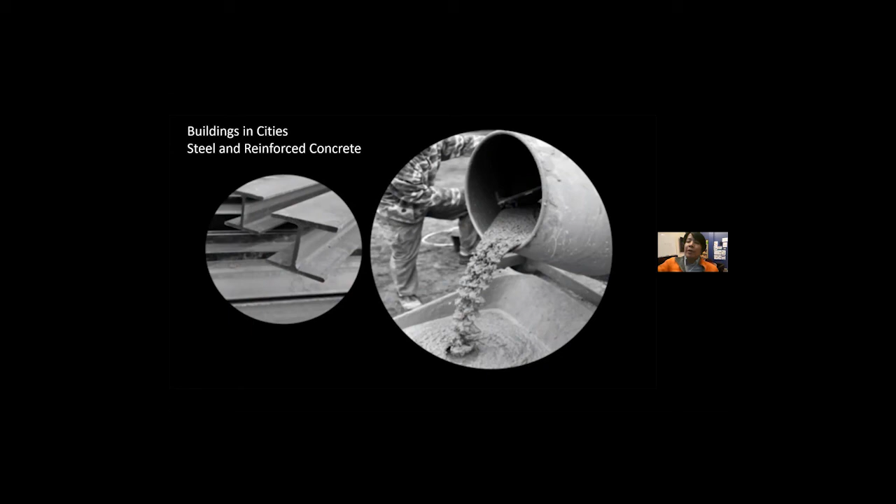So if we somehow replace the use of concrete, 1 cubic meter of concrete replaced by timber or wood, we can actually reduce the emission of CO2 by 1 ton. That means we're going to cut down the 11% CO2 emission from the construction industry. So, we've been using the power of the sun to grow our food. Maybe we could also grow our city using the same power of the sun, grow our city by using more wood instead of steel and concrete.

And in terms of the United States, what we know here is about 40% of the US population actually reside near the coastal area counties. Many of us like to live close to the waterfront, and more population in the US will in fact shift towards the coastal areas. One thing about coastal areas is they are also subjected to many natural disasters, especially hurricanes, and subjected to high wind, especially along the eastern coastline and the Gulf Coast area.

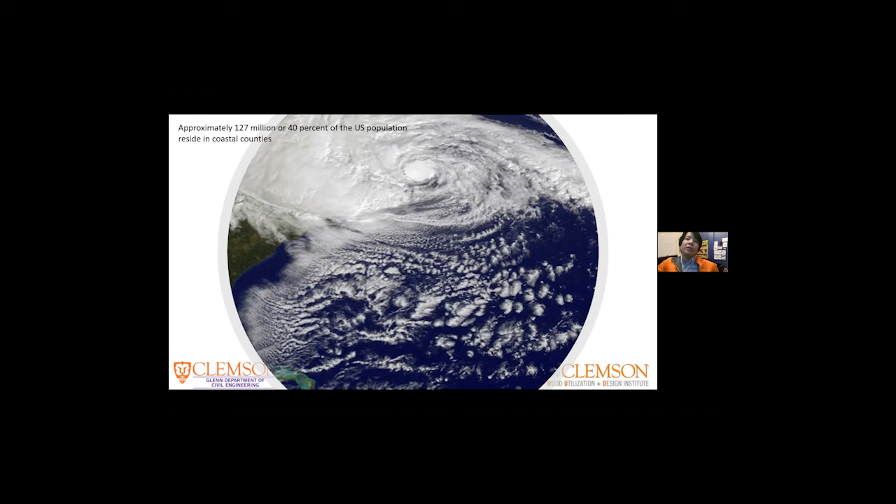And we often see, after a major hurricane makes landfall or even a tornado event, our structures are damaged, especially residential homes, apartment buildings, hotels and so on. If you look at economic losses on average, hurricane, windstorm, thunderstorm, and tornado related events, including flooding as well, account for about 54 billion US dollars. If you break it down further, 34 billion is residential home dwellings, 9 billion lost to commercial, and 12 billion to public sector buildings, right?

Many of you, I believe, understand cross-laminated timber is a much better or resilient structure. So we suspect it has the potential to resist the demand of high wind events. So at Clemson, we looked into this problem. I'm a civil engineer and professor by training. We have several projects looking into the potential use of CLT for high wind application, all right? So I'm going to go through some of the research studies.

One is what kind of debris impact resistance we can expect from CLT. Obviously, in a high wind situation, you have debris flying around. It might impact the building envelope of our structure. Regular light frame structure is not very resistant to debris impact. We also have some research looking into the lateral load impact on the building, the wind blowing on the surface of our building. At the end, we quantify overall building performance of current light frame construction versus CLT, and what added benefit we can get from CLT.

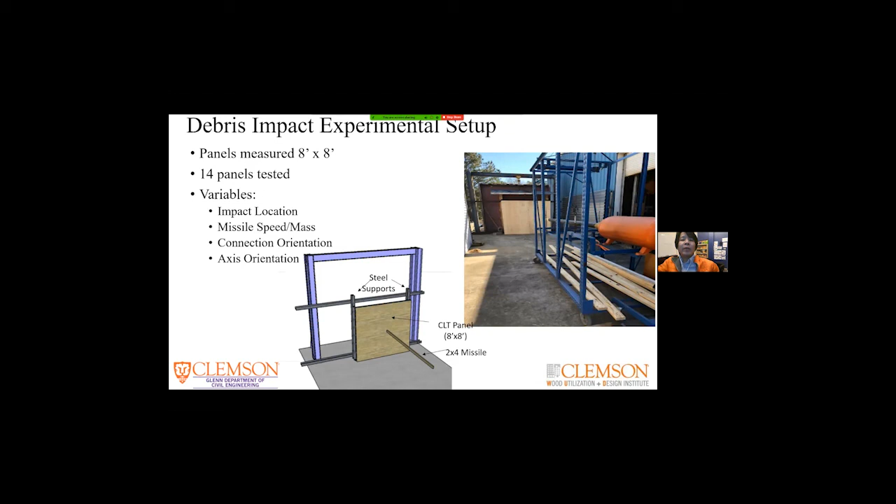All right. So we tested a total of 14 panels, with different missile mass and speed and impact location. If you hit it near the corner versus near the middle of the panel, it gives you a different response, and some locations are much more vulnerable. And also the connection orientation: sometimes you have the panel directly bearing on a return wall, sometimes it is not, when you hit it from the other angle.

So, if you follow the ICC 500, the FEMA safe room guideline, we need to define certain failure criteria. So there are 3 different failure criteria. Obviously, if you have the debris punch through, like penetrations, that is considered failure. If you have permanent deflection, if you look at the picture in the middle here, you have some deformation at the back side of the panel. Anything more than 3 inches is considered failure here.

The other failure definition here is if you somehow have part of the wall dislodged, for example, one piece of the lumber delaminated from behind the wall, that is considered failure as well. So we track all those at different impact locations, corner, middle, and so on. I'm not showing the detail behind the scene. So we tested different locations and different panels. We come up with what is called the fragility curve.

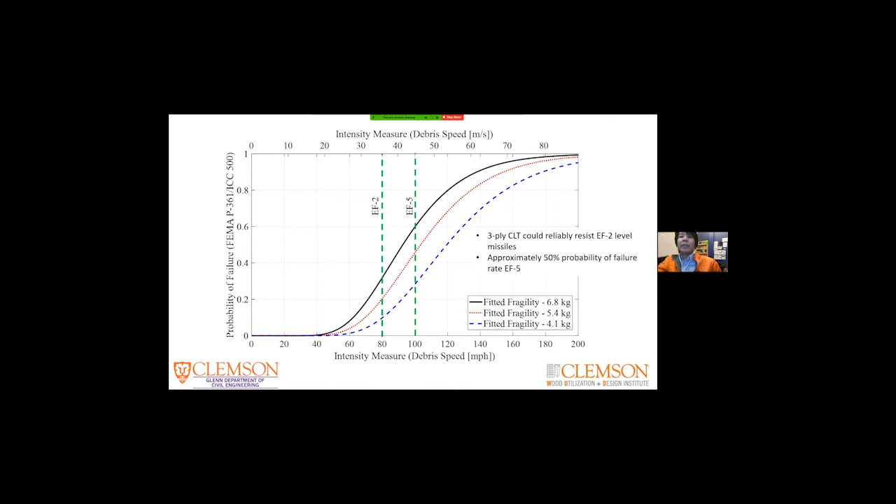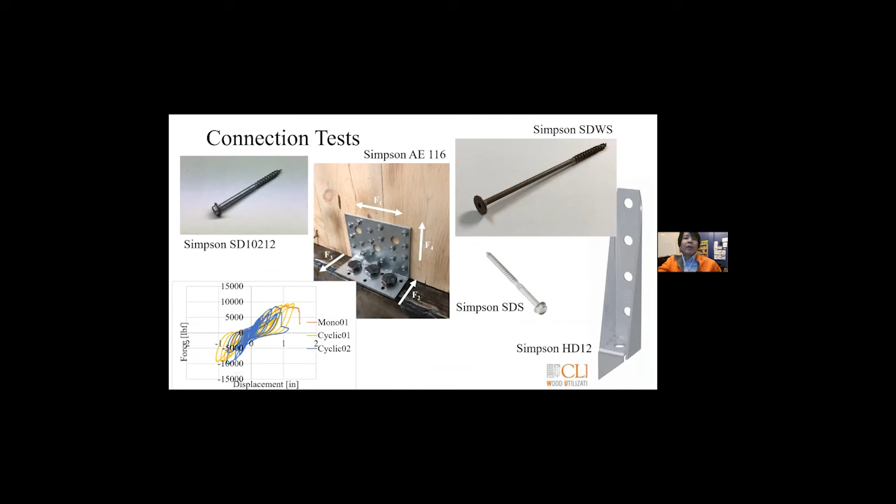We test all this because we cannot keep testing full-scale walls in our lab. It's pretty time-consuming and costs a lot to conduct the test. So after we perform all the connection tests, we can build a computer model and put in all the behavior of the connector. The connector is much easier for us to test at a small scale. And we create the computer model that can actually mimic our full-scale test response.

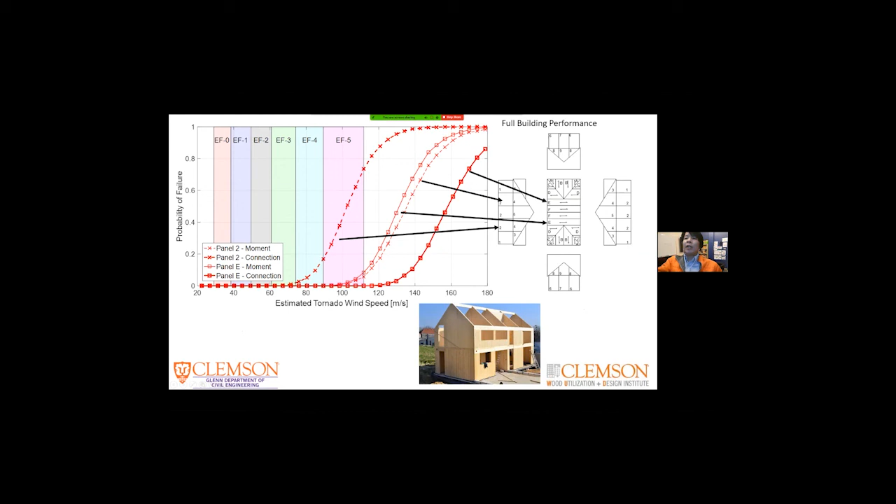And from there, we can put together a full-scale CLT building and then use computer to simulate the behavior under different wind load and debris impact, right? So at the end, we consider the moment, rotation, the connection failure, and so on at different panel joints. So collectively at the end, we are able to quantify, hey, for a typical residential building, if we have light frame, we have a lot of experience with light frame, versus CLT, what kind of performance increase we can obtain here. So again, this is something called a fragility curve.

Vertical axis tells you the probability of failure, damage to the building, light frame versus CLT. Horizontal axis shows us the wind speed, estimated tornado wind speed here. Clearly you could see CLT is much more beneficial here. It can pretty much resist damage up to EF3 tornado. Around EF4 and 5, you start to see a high probability of failure. Consider light frame structure, pretty much under EF1 and above, you can expect almost total destruction to the light frame building here. So clearly we see benefit in terms of building using CLT here.

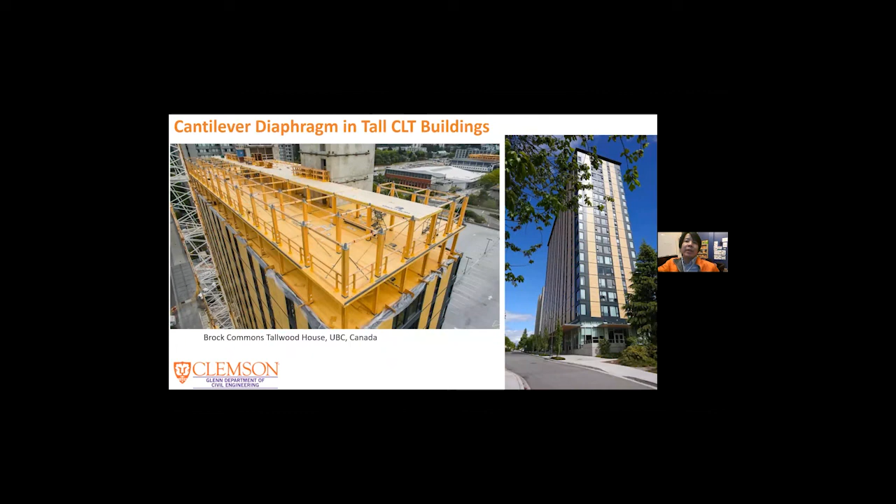I talk a lot regarding residential low-rise structures. In fact, the major market right now for CLT is in mid-rise and also tall CLT buildings. What you are looking at here is Brock Commons Tallwood House, student housing, a student dorm constructed on the UBC campus in Canada. This is an 18-story CLT building. They have a concrete core to support the building. And in this kind of building, often you see big openings at the perimeter of the structure. That means there's not much wall to provide shear resistance, okay?

So if you look at the floor here, just take this piece of floor, it's called a CLT floor diaphragm. That's why we classify it as a cantilever diaphragm, because why? It's attached back to the core structure here, right? So it's fixed to the concrete core. If wind or earthquake loading pushes on it, we can expect shear deformation. The floor will try to deform into a parallelogram here. So far, there's not many tests for CLT diaphragms.

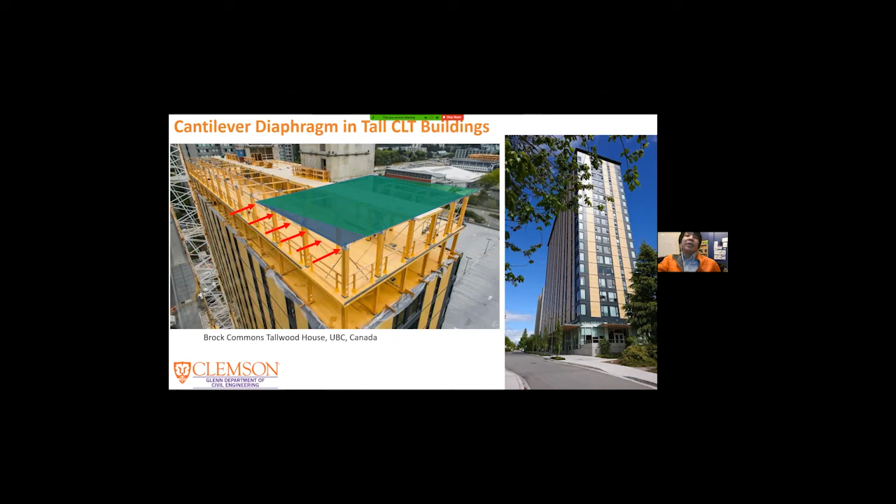So what we did here at Clemson, we constructed a full-scale CLT diaphragm, a 20 feet by 20 feet CLT diaphragm, and simulated the cantilever behavior. What you are looking at here at the corner, the steel beam, is to simulate the concrete core, fixed condition, and we use an actuator to push the end. In this diaphragm, we have 8 pieces of 5 feet by 10 feet CLT panel. At the joint here, we routed a groove 1 inch deep and then put plywood on top and then used nails to stitch those joints together. At critical locations, we also put in tension straps to carry the tension load here.

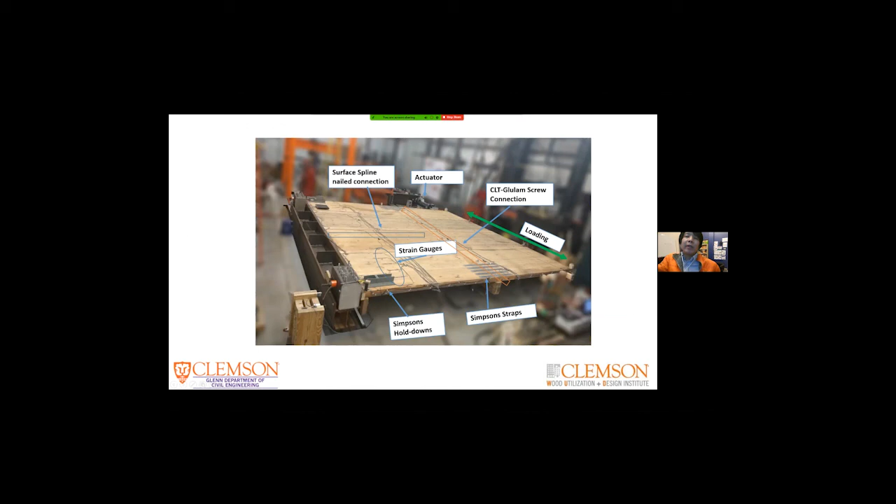If you push on it at the end of the cantilever diaphragm, here, right, at this joint, it will try to open up. So there's a very high tension force. So we use tension straps to pull it together. Now, based on our engineering knowledge, we designed this diaphragm to take up to 22 kips of force from the actuator. So this is a picture showing the actual diaphragm in our lab setup. You can see the metal strap here and the giant hold-down manufactured by Simpson Strong-Tie company.

So here I'm just showing a video. We put a GoPro at the roof of our lab here, looking down to the diaphragm. What you see is the actuator keeps pushing on the diaphragm, and you can see the metal here shining, right? Kind of light reflection. That is actually the metal strap yielding, almost breaking here. And we keep pushing it, at some point it breaks. You can see the separation here. So we are able to quantify at what point the strap will break and at what load.

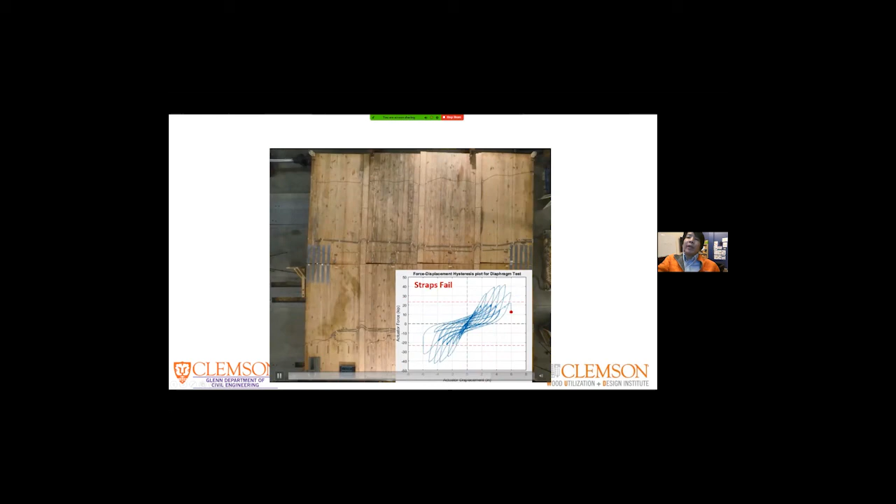So at the end, if you briefly look at the summary of the result, the peak load is slightly over 42 kips at around 4 inches of displacement. In terms of the engineering calculation, in fact, it's quite accurate. If the engineer goes by the engineering principles, our design load is 22 kips. We actually have a safety margin of about 1.8, close to 2, which is what we target. And also the tension strap did not break until post-peak.

This means before the design load, it actually is protecting the diaphragm without breakage. So that is what we learned. And similarly, we put together a computer program to model the whole thing by simply testing all the connections. We are able to use the computer program to represent what happened in the full scale.

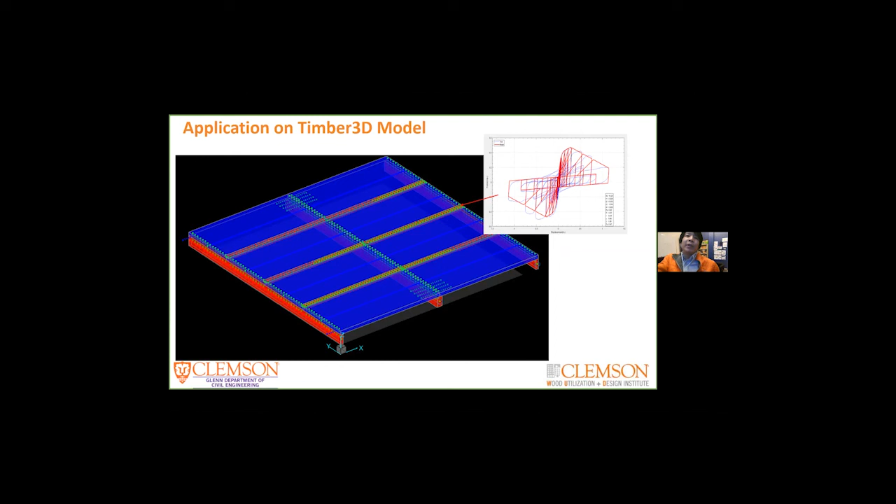And again, it is too time consuming and too costly to keep testing every possible configuration. So what we can do here is use the computer program to test different configurations and layouts for CLT diaphragms. Now, with that, I'm going to come back to try to answer the question: is it worth it building residential structures with CLT? In terms of risk assessment, it's the safety.

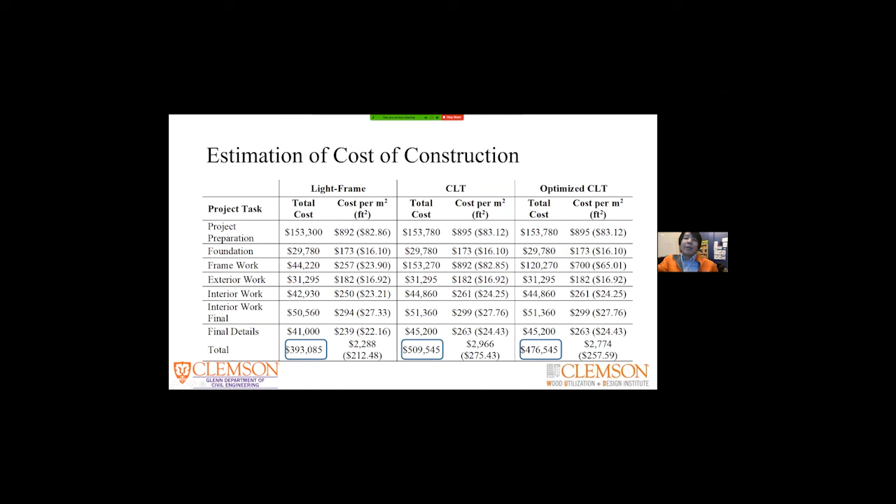So we actually costed out a typical light frame structure at a certain location. Here, we're trying to compare the same construction by breaking down the whole construction cost into project preparation, foundation, and so on. CLT at the end costs more because it uses more wood, material-wise and so on, compared to light frame, 393,000 versus about 476,000.

However, one thing you need to recognize is we have not considered other costs such as loss of human life, downtime, and injury to the occupants. These are the costs we have not included. If you include those kinds of costs, perhaps it is worth the investment to build even residential structures using CLT. I think that's all I have to share with you guys.

So really, this presentation was born out of frustration of working with developers, architects, owners, engineers, all really interested, like the people at this conference, in building mass timber structures, and then running into the wall where you get your first cost estimate, and they say, well, this mass timber stuff is way too expensive. So it goes off the table, and that's the end of that.

And I wondered what I could actually do to maximize the possibility of success with a mass timber building. Yesterday, there were a bunch of questions asked that were framed in the form of, well, we're designers. What can a designer do? What can a designer leverage?

And that's really what this is about. It's about really decisions that designers make that ultimately can really affect the cost of the building. Drew yesterday from StructureCraft talked about this at some length as well. In fact, if you've been listening closely, I don't think there's anything in this presentation that is different from what you may have already heard at some point in the symposium, but it'll just be presented maybe in a little bit different way.

My approach is to go through the dollar cost of different parts of a mass timber building, starting at the low end with elements, and then working my way up to just single bays, and then larger building types where we actually incorporate all the IBC building types, and then looking at entire building archetypes in steel, timber, and concrete. And I'll finish with a little bit of discussion about embodied carbon, because I've vowed not to talk to groups of people without bringing it up ever. So I'll finish with a hopeful note there.

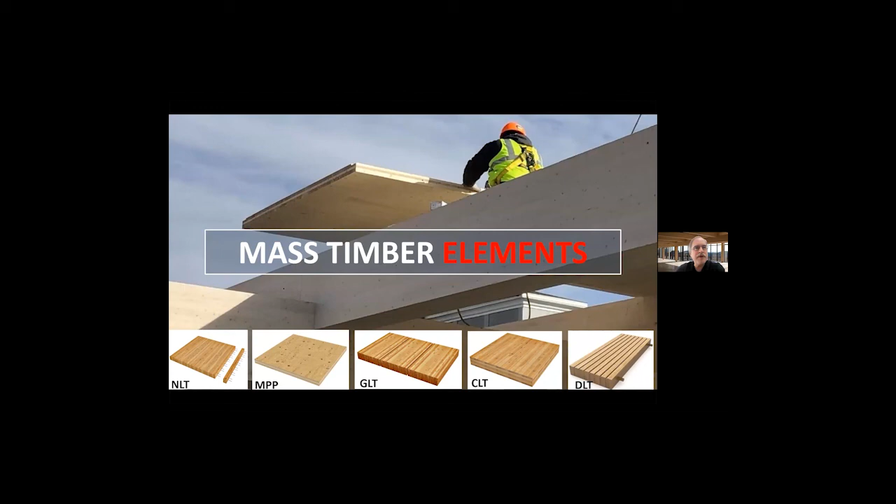My first slide, since I'm going to talk about cost, I thought I should start by talking about the commodity element of mass timber. CLT is made up of lumber, and lumber prices go up, they go down, they're going up and down probably even as we speak today. It can be very, very dramatic. And that's another way of saying that as I go through this presentation, I'm going to show you dollar per square foot costs of mass timber structures and other kinds of structures. And this slide tells you don't believe it for a second in terms of the actual final cost.

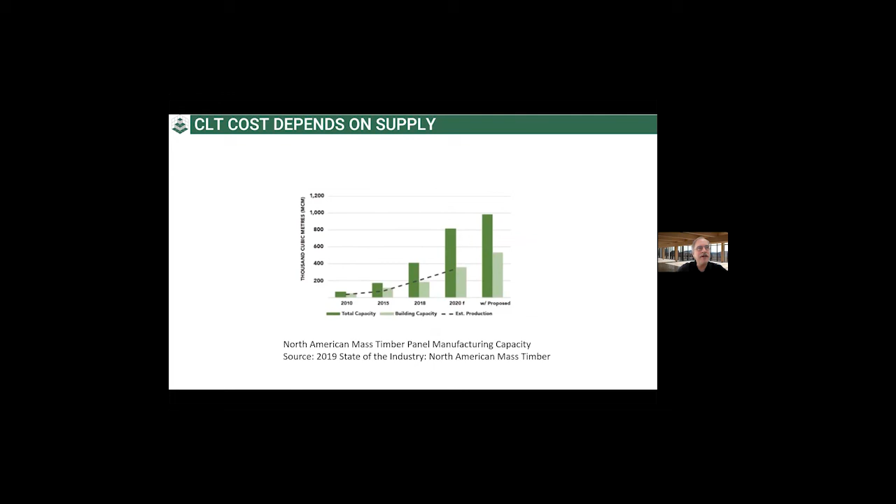I'm used to pricing steel structures. Steel structures are driven pretty much by labor: 2/3 of the cost is labor, 1/3 of it is material. For mass timber, it's the other way around, and even exaggerated a little bit. I don't know what the fraction is, but it might be 80% material and 20% labor, or even more. And that's actually kind of good news for designers, because it's easy to keep your eye on wood volume and know that if you decrease the wood volume, you'll be decreasing the price. We've worked on our end to try to get floors and roofs down to 3-ply wherever we can. At the end, when we start talking about carbon a little bit, it goes the other way. Of course, that 9-ply CLT sequesters a lot of carbon, but we're starting out talking about cost.

The other thing is that CLT is really not a commodity. It's made in a lot of different places. Each manufacturer does it a slightly different way. They have different widths, different lengths, different lamination thicknesses, species, finishes. It's really quite a dramatic variety. So you cannot treat it like you're ordering a sheet of gypboard, right?

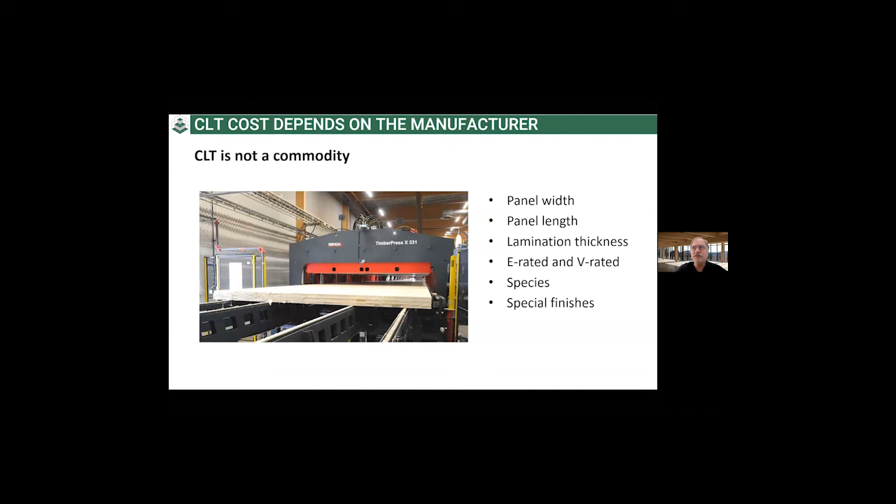At the end of the day, you're going to find that the best way to truly optimize the price is to find a way to be sitting with the manufacturer as early as possible in the process, or the fabricator, the people that are actually going to build the structure. I'm pretty sure that Lucas will back me up on this. His group actually supplies that kind of information early on. And the earlier you can get to the table and know the specifics about their product, the cheaper you'll be able to make it.

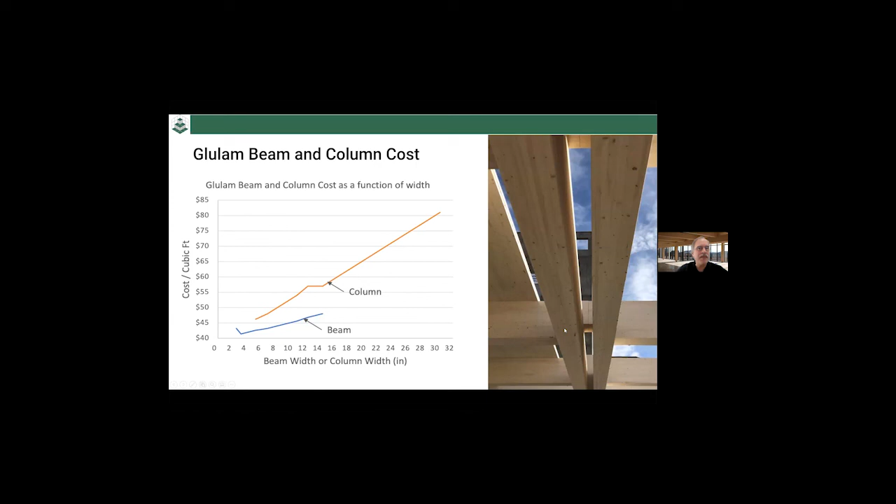So again, this is something that you need to get or understand from, or just be counseled by the fabricators themselves. And likewise, glulam beam and column costs that form a part of the following studies are just unit costs. Some people find it interesting, myself included, that the unit cost of glulam, the cost per cubic foot, is actually dependent on the width. So the wider the beam is, the larger the cost per volume is. So it's not just linear with wood volume. So that's an interesting point.

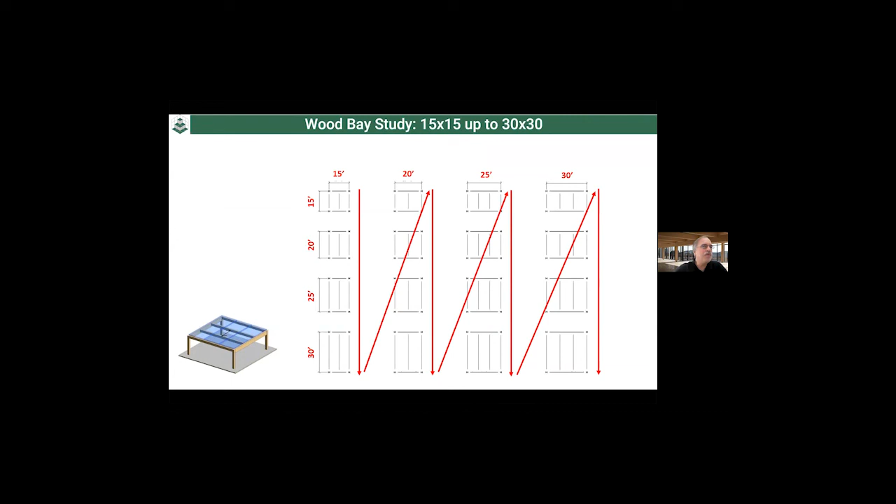So now let's take that information and move it forward and look at the cost of just some very, very simple bays, square rectangular bays. And this goes back to a study I did a couple of years ago now. Just very, very simple minded. I framed out a typical bay, starting with 15 by 15, and then I increased the beam lengths up to 30 feet. Then I went back and increased the girder length up to 20, and increased the beams again, and so on down the line until we got up to 30 by 30. Then I applied all those rules for cost of the elements based on volume and so on.

And I made this plot, which shows the cost per square foot for each of those different grid sizes, one by one. The brown section of the bar represents the cost of the wood. The red represents the cost of connections, and the gray is constant because that's the cost of the topping, which I didn't change for any of those. Interesting to note, although I'm not going to go into it today, is that the percentage of the cost of the whole thing that is connection is significant. So connection design, while I'm not going to talk about it, is super important.

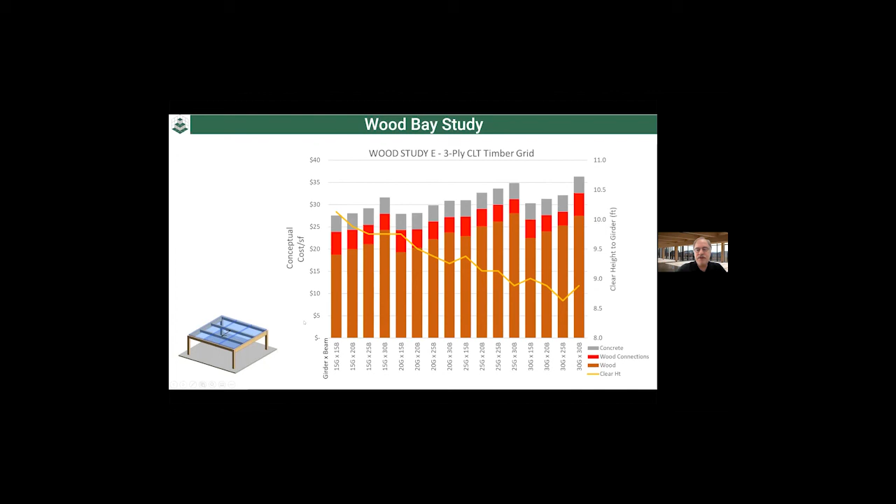Another piece of data here is this orange line, which goes along with the right-hand side. And that's telling me the clear height for a 12-foot floor-to-floor to the bottom of the beam. So you can see, obviously, the longer the span, the deeper the beam, the closer you are to knocking your head when you get to the end. What's most interesting to me about this plot actually shows up when it's shown relative to another one.

Sherry brought this up yesterday, which is don't start with a steel building and then superimpose a wood idea. Wood needs to be designed as wood. Going back to Louis Kahn, what does steel want to do and how does it work? What does wood want to do and how does it work? If you want a cost-effective wood building, design a wood building. Don't put some wood icing on a steel structure.

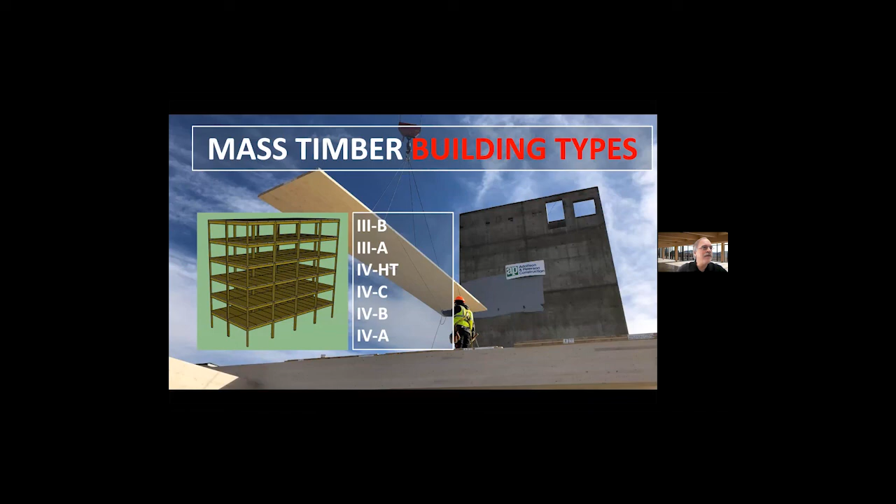To do that, I went across the street from my office to the Colorado School of Mines and enlisted the help of Professor Shiling Pei and his student Rachel Chigaris. And they were much smarter and more efficient than me. And we developed some programs to do what I had done by hand and to do it relatively quickly.

So the big difference between this study and the last one I showed you is now we're incorporating fire rating requirements, which have a real effect on the volume of wood if you're using the wood to create the fire resistance, and also non-combustible protection that is required for certain of the Type 4 systems.

So having done that, the good folks at the School of Mines, instead of just checking grids every 5 foot on center, they've got a computer to do it and check the grids every 6 inches, right? And so they developed a contour map of cost. This is the 2D version, and then this is a 3D version of the same thing. And you can kind of see these mountains of cost variation for different grid sizes.

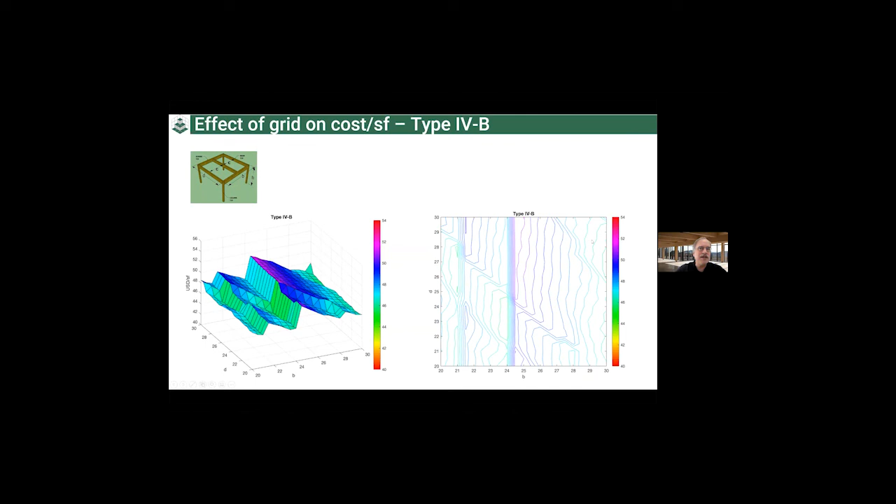There's some really interesting patterns that grow out of this. Like one is you see these sort of diagonal ridges that show up. Those pretty much represent increase in connection cost as the beam and girder reactions go up. That was kind of interesting.

And then another thing that's a little bit more obvious, you'll recognize this picture because we talked about it before, and you see that mapping of the press length versus the required panel length just superimposes itself over everything. So once again, this thing, which is unique to the manufacturing process, has a profound effect on the cost and even your choice of a grid. So again, you really want to engage manufacturers, fabricators, builders pretty early on.

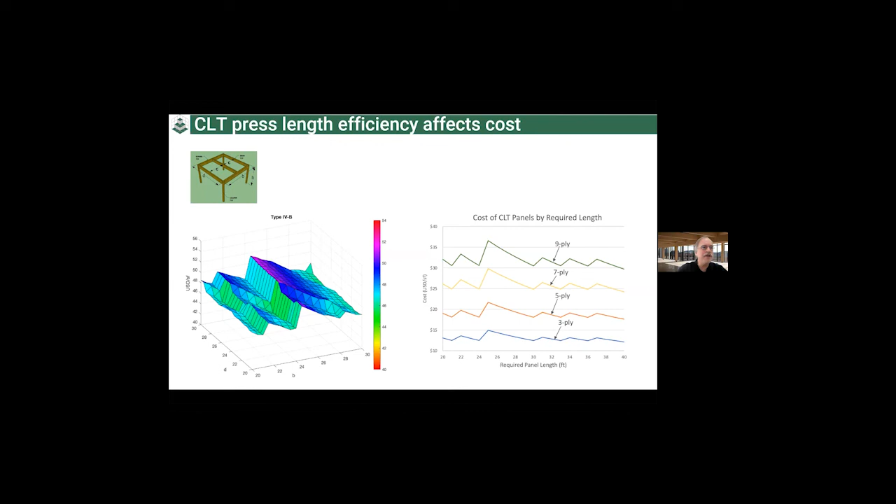Another fun study that came out of it was to look at like a 6-story building and, as Drew said yesterday, even choosing your building type will affect ultimately the cost, right? So this asked the question, for different grid sizes in a 6-story building, which building type is the least expensive? So using the number 1 to represent 3A and the number 6 to represent 4HT, it shows you there's this zone where the 4HT is actually more economical than a Type 3A structure.

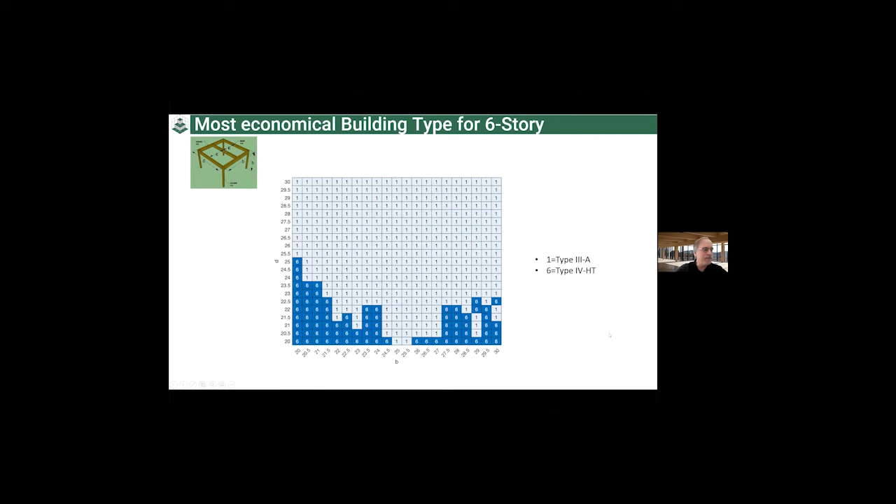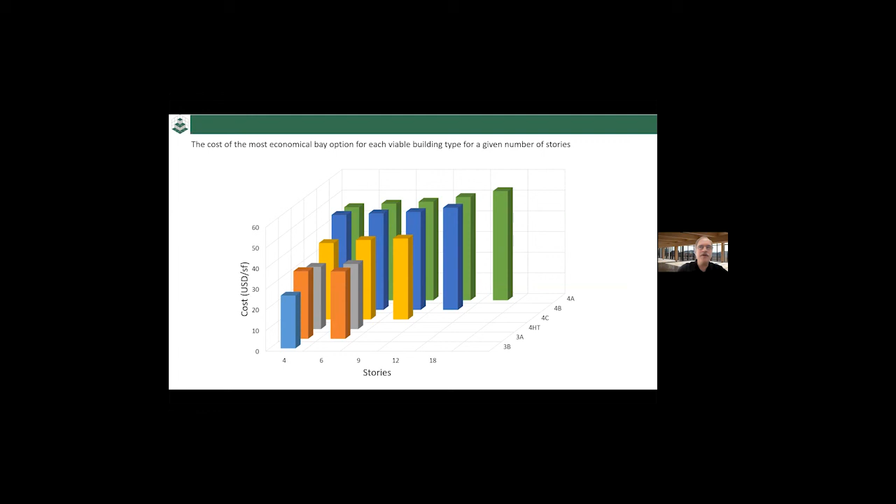So now let's look at full building archetypes. This time we looked at an entire building. This is a mass timber building on a 30 by 30 grid. It's a totally idealized rectangular building like an engineer would design, not a good architect, but that wasn't the point. We designed the same one in steel, concrete, and mass timber. And despite what I just told you about optimizing grids, we used the same one for all 3 buildings, thinking that was a pretty good middle of the road grid that should work for all of them.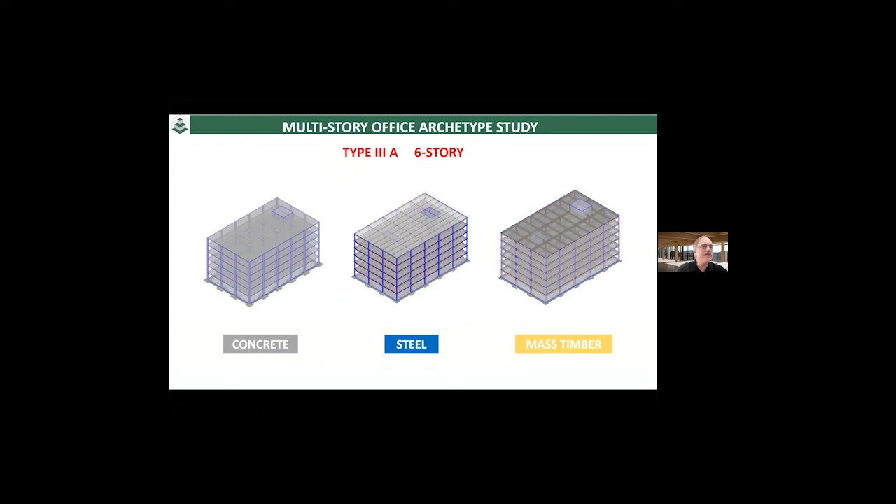And then we went to a real contractor, the contractor that built the Platte Fifteen project here in Denver, and had them price these options out. And this is actually the slide that I mentioned, that the presentation is born out of frustration a little bit. And this is it, encapsulated. And I've known a lot of people that have seen this over and over again.

So in this case, in this market, when we priced this about a year ago, it just happened that the concrete was the cheapest structure in Denver at that time. The steel structure was a 4.5% premium over the concrete structure. And the mass timber raw material installed was about a 14% increase.

And this is the point when the developer says, boy, I sure would like to use mass timber, but that's just too much to pay. So it gets taken off the table. In fact, this number, talking to some folks around the country, is actually not that far off base. I've seen it a lot of times.

As I said, though, the contractor that did the pricing had built mass timber structures. And he said, wait a minute, let's look at how quickly this structure goes up and see if we can quantify that. And as it happened, by their estimate, the wood structure would have gone up 3.25 months faster than the other 2 structures. So that time relates directly to the value.

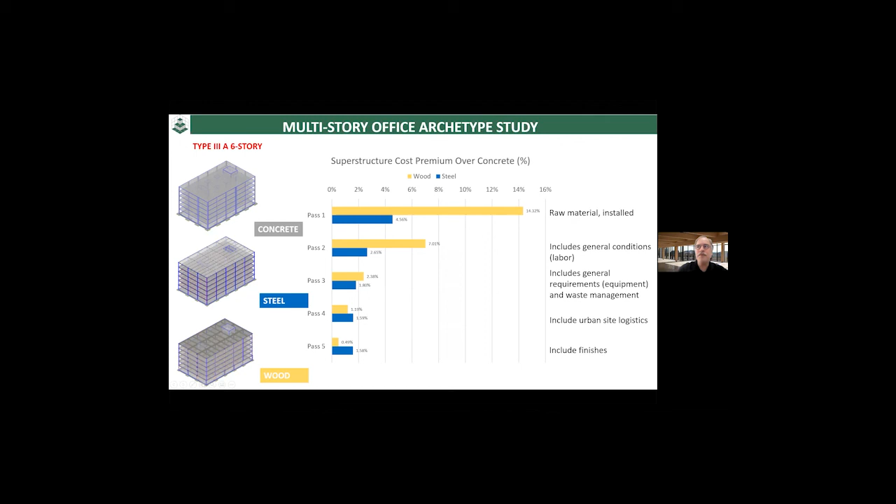And now I cheated a little bit, stepped outside the realm of structure and said, gee, the wood doesn't need any ceiling finishes, but these guys do. Now the wood structure is actually ahead of the steel structure, and it's getting down to some pretty reasonable numbers. And this is just superstructure cost, right? For a typical building, the superstructure might be 15% of the whole building cost. And if I look at this premium for mass timber relative to the whole building cost, in this case, it went down to near zero.

Now, I will point out that this is a very idealized engineering blocky building. It has multiple stories. It's very repeatable. It can very much capitalize on the speed of construction. So I might be tilting in favor of the wood structure here, but still these numbers get you down into the zone where you can have a discussion.

So with that, I want to switch quickly to the notion of carbon. Many people have talked about it in much greater detail than I can or will, but I like to make it a part of every conversation now, right? So we saw before for my study of building types and stories, this is the cost numbers. This is the same picture you saw before. We went and did LCAs just on the structural system itself, just on the wood volume only for those same systems. And here's the global warming potential cost, which I put in quotes because of course it's negative. So it's really quite a benefit.

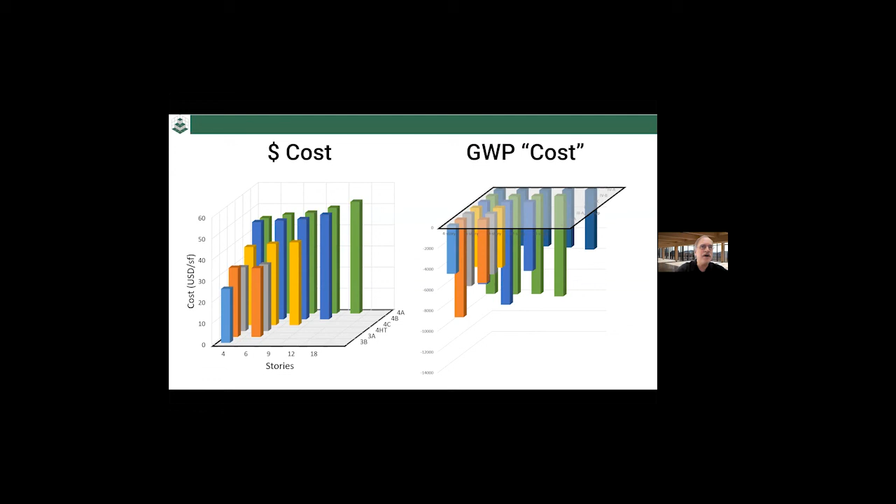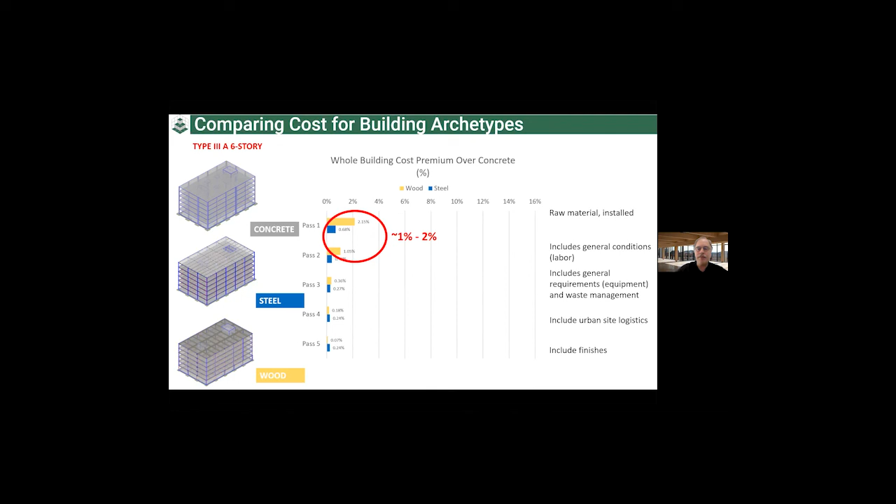So in any case, here's a value, right? And we want to assign a price to that. So I'm back to my curve about what the premium is, and just forget the timing for a moment. Let's just say we're down into the 1% to 2% level. How do we jump that gap? And with that, I would introduce a group that we've been working with for the last couple of months, Aureus Earth. I want to say they're out of Boulder because my friend Wil Srubar is in Boulder. He teaches at University of Colorado, but my only meetings with them have been over Zoom. So in truth, I have no idea where they are.

First building we looked at, it was a very small building with just a very little bit of mass timber in it, and it was kind of disappointing. The benefit is about, I don't know, 50 cents a square foot on the building. But we're looking at one now, a 200,000 square foot mass timber building that may well benefit to the tune of $2 a square foot from this process. So that doesn't completely cover the difference in the cost of mass timber, but it certainly opens the developer's eyes. So that's a hopeful note.

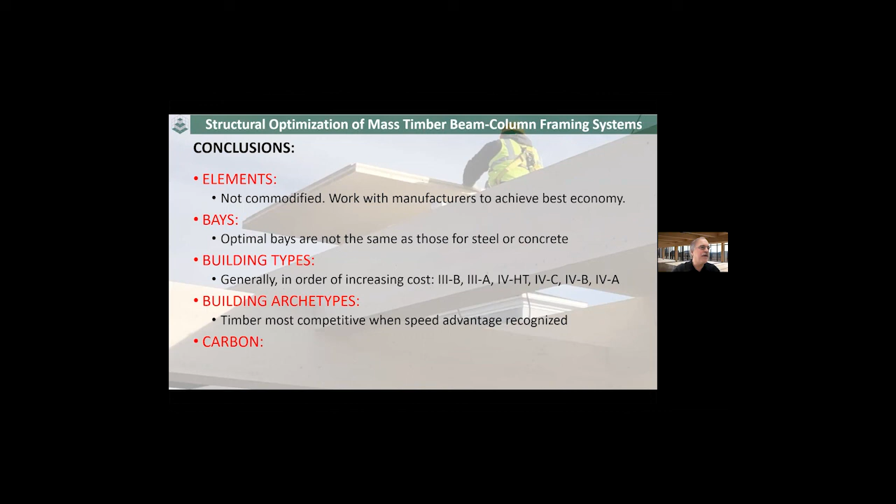So a quick summary, looking at elements, we learned that mass timber is not commodified. Get to know your manufacturers. Bays: the optimal bays are not the same as for steel or concrete. When we look at different building types, generally in order of increasing costs, start with 3B and work your way up to 4A, about in that order. And then the building archetypes taught us that timber is most competitive when the speed advantage can be recognized. So multi-story buildings with some repeatability. And then finally, the carbon advantage of mass timber may now be able to help close the gap through carbon offsets, which is a truly monetized way to represent the value.

So today I'm just going to talk a little bit about some of the timber engineering that we've had the privilege of getting involved with in some of our past projects, and really where we see the next boundaries in timber engineering, both in the mass timber space and then also in some more of the longer span free-form type structure space. Our company, StructureCraft, we're structural engineers and builders. Similar to Greg, we got this kind of integrated approach to looking at both the engineering and also the construction side of things.

So first today, I wanted to talk a little bit about mass timber, and in particular, a brief little history thing, and then looking at the core systems for mass timber and what the different types of core systems are from a typology perspective. History of mass timber, obviously most of you will be aware of the strong history we have here in the US and Canada of actually building these really big mass timber buildings.

These heavy timber, brick and beam, mill timber buildings that use the solid laminated deck and these beautiful old solid sawn Douglas fir beams and columns, creating this aesthetic that we see in the warehouse districts of many of the cities across North America. And I like to show this building in Minneapolis because it's 5 minutes down the road from the first really big mass timber project I was involved with, which is the T3 building in Minneapolis.

This is called the Butler building in Minneapolis, and it's really quite an incredible structure. It's 500,000 square feet and 9 stories tall, and it was built back in 1906. And to date, there's not a single mass timber building in the US that's bigger than this. There's just about to be one that's taller than this. It's under construction right now, or a couple in Milwaukee and Cleveland.

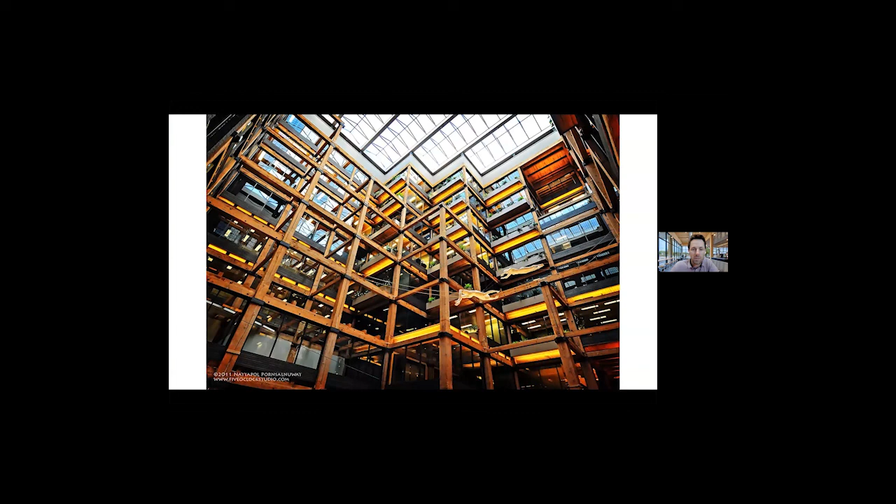But this kind of behemoth of a mass timber structure from more than 100 years ago still stands out as an achievement to what we as a society were able to achieve with timber structures back in the day. And it's good to look back to look forward. And so these old buildings, they use these huge solid sawn timbers out of logs that we don't chop down today, and we shouldn't be chopping down today. But now what's really enabled the next generation of timber structures is this idea of engineered wood products, CLT, glulam, and you've heard about it.

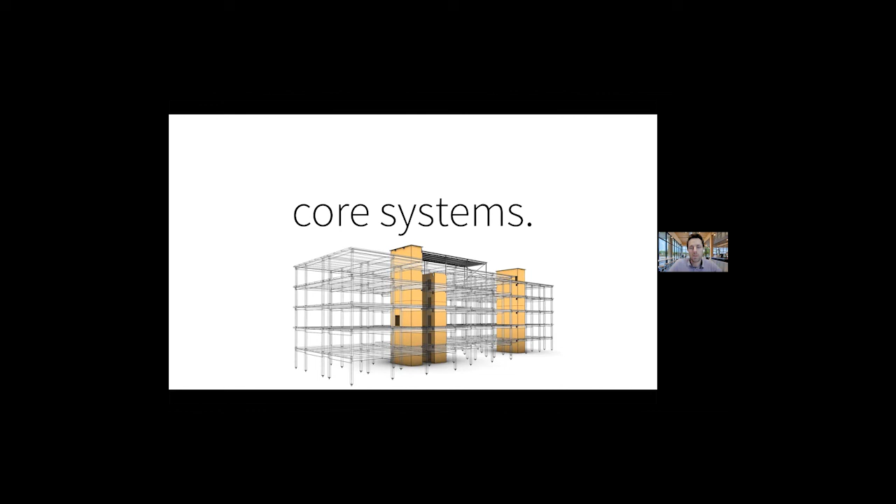So today I just want to focus on core systems and look at some of the different options in terms of lateral force resisting systems for these mass timber buildings. And I'll do that through a series of really quick case studies. This little diagram here is looking at CLT cores for a project we're doing in Baltimore right now. So we're going to be using CLT cores, and CLT, like Greg was saying, uses a decent amount of material, and the wood material becomes a large portion of the cost. So figuring out how to get your wood volumes down is really important.

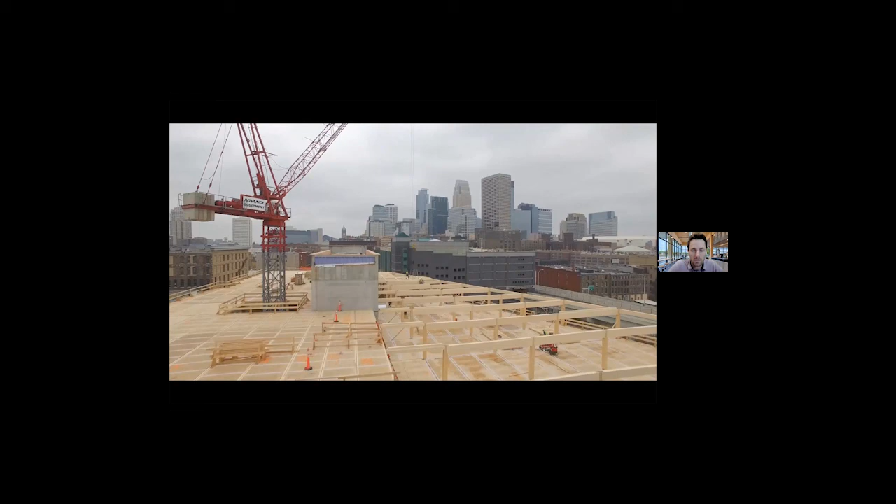I'll start with concrete cores. This is the first T3 in Minneapolis, which is really a very simple structure. From a structural standpoint, it's a concrete core, and the mass timber superstructure that surrounds it is a gravity post and beam. On Greg's plots there, this would land in at about the 20 by 25 foot grid mark. So a very simple structural system, prefabricated elements. And the real challenge here from a construction standpoint is the concrete core is going up at the same time as your mass timber is going up.

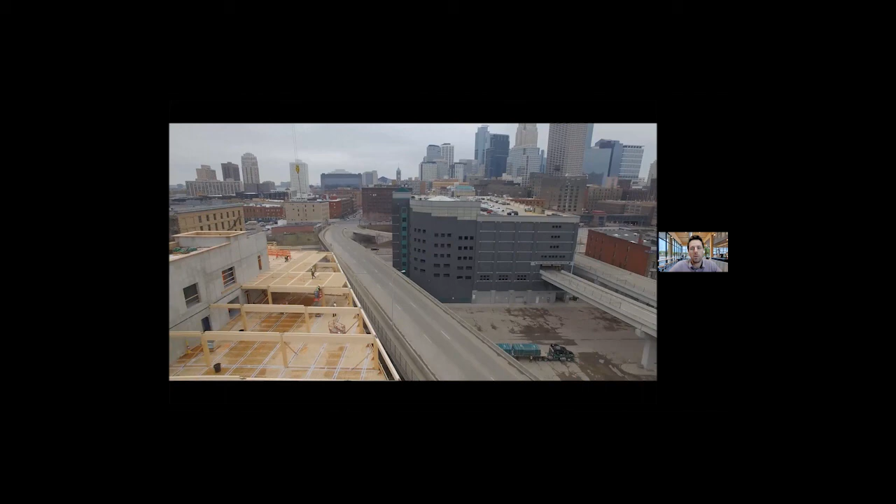And so what that means is if you've only got one tower crane on your site, one of the big challenges is how do you erect both structures at the same time? And so I show this because I'll show the next T3 we did, which uses a different lateral force resisting system, which is more integrated with the mass timber. But I think the great thing about the concrete core, particularly in the high seismic regions, is that you've got a very well-known material, very well recognized and accepted in the building codes.

And so there's definitely a place for concrete cores. And we're still doing quite a few projects which have concrete cores. So it really depends where the project is. But this project here was done 2014, 2015-ish. And it was kind of one of the first big ones we had done, and the concrete core seemed an obvious choice at the time. MKA was the engineer of record on this project, and we were kind of doing all the detailed timber engineering for the timber structure.

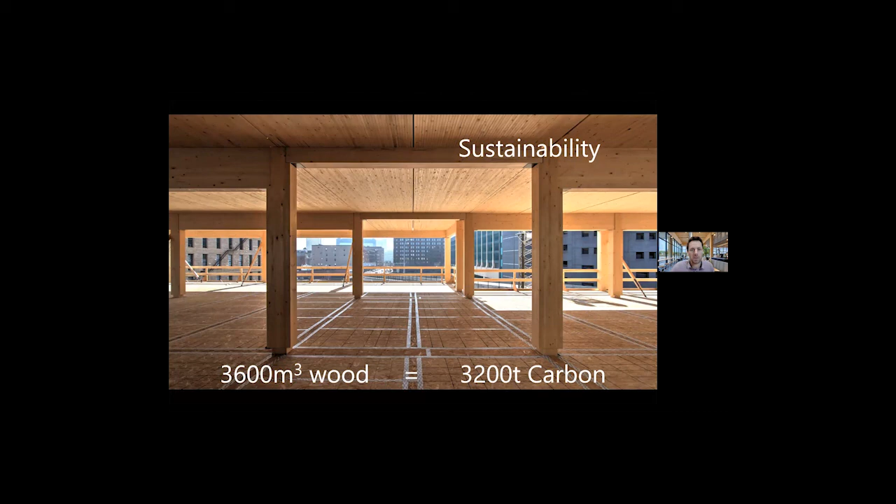And of course, the sustainability Greg mentioned, this idea that we lock the carbon into the structure is a key part of why we see developers like Hines wanting to proliferate these big mass timber buildings around North America.

The second T3 building in Atlanta, which was recently finished, I guess maybe about a year and a half ago now, is actually using a steel brace frame. And so this idea, you can kind of see in this little animation, that we can take the lateral system off the critical path of going vertical with the superstructure. In this case, the steel frame is a hybridized frame, steel braces and timber columns, and that creates what we found to be a really efficient system.

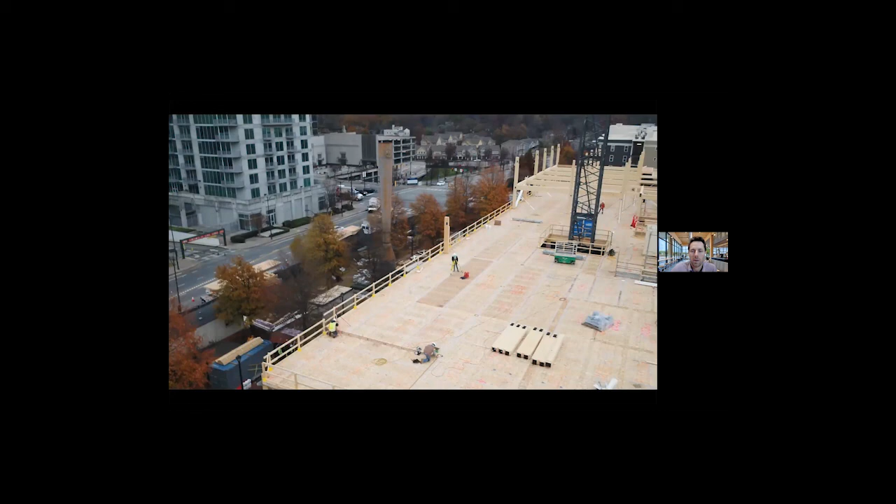We're able to install the bracing system off the critical path of the superstructure. Definitely made the install go faster, and I think also, the prefabricated nature of the steel frame lends itself a little bit more to the way mass timber is, this kit of Lego that comes together on the project site.

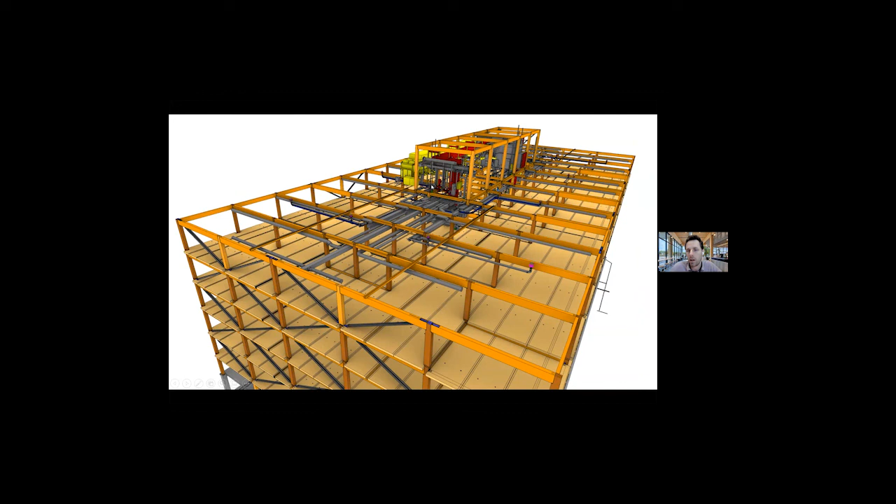Integration with mechanical in this, now that we're using a steel brace frame, inside the core is all timber. It's not concrete anymore. So you got to think about how you're running all your services through the timber. So, prefabricating and looking at how the mechanical runs and all that stuff is coordinated into the timber structures is super important. Even more so when you're not doing your core out of concrete anymore, you're doing it out of timber with some steel. So that's a quick look at a steel brace frame.

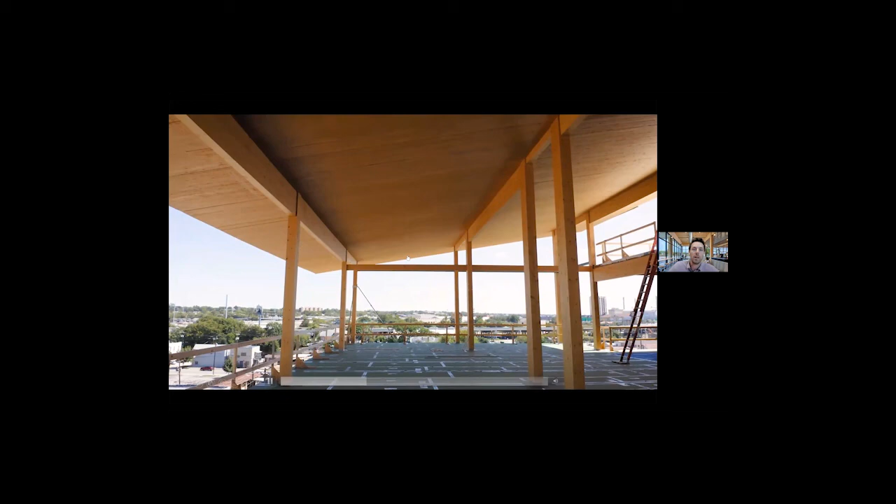This project is in San Antonio with Lake Flato, and we were the engineer of record on the structure. And this is using a concrete core again, but using wood in some areas here. You can kind of see we're transferring out an entire column from a gravity perspective onto a series of braces, which also act from a lateral perspective. And here, one of the interesting innovations is using a raised floor. And we're seeing that more and more people are interested in raised floors, now that we're looking at a post-COVID marketplace in terms of air distribution, et cetera.

So this is our kind of 3D fabrication level of detail model with all the screws, et cetera. And then one of the construction shots in the finished building is also supporting brick off the mass timber, which is quite a tricky thing when you're looking at brick and supporting off the timber, which tends to creep over time. Brick is quite a deflection sensitive material, so something that requires some careful detailing.

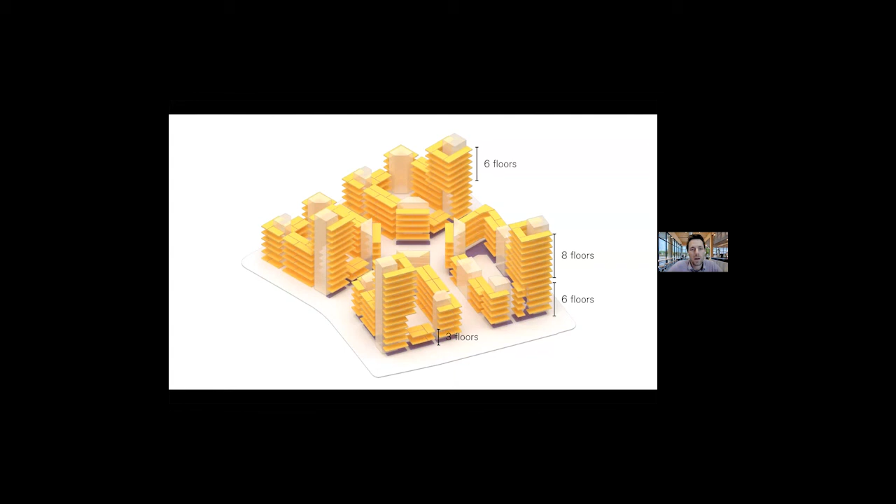There's another big residential project actually down in South America we're involved with right now, which is looking at, from a residential perspective, how do we use mass timber? And we're actually looking at point supported CLT for a 2-hour fire rating. So exposed CLT for 2 hours of fire and using point supports. So really, that'll be quite an innovative project because most of the time when you're doing the point supported CLT, the CLT is then covered with gypsum to achieve the 2-hour rating.

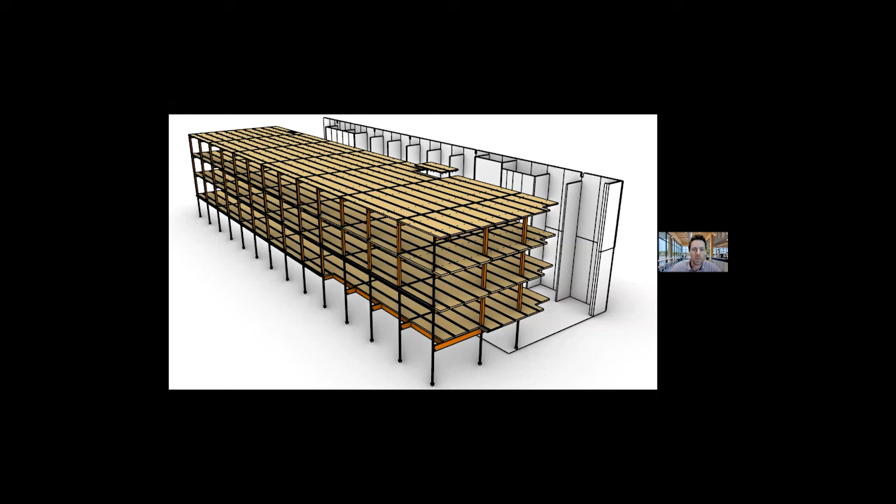Here, a project in Des Moines, Iowa, where the mass timber is kind of integrated with a precast core system. So sometimes precast can make a lot of sense as well. Here we've got the series of precast core components along the backside of the building and the prefabricated mass timber, allowing the whole superstructure system, even though you're doing concrete and timber, you're still all prefabricated. Came together really quickly, and I think in some regions, this type of a lateral system can make a lot of sense.

Finished project. And finally, just a look at the lower level multifamily, or in this case, this is a hotel project in Austin, Texas, where we're combining kind of a mass timber roof and floor system with prefabricated stick frame walls. This can also be really cost effective depending on, like Greg was mentioning earlier, which kind of building type you're in and the size and height.

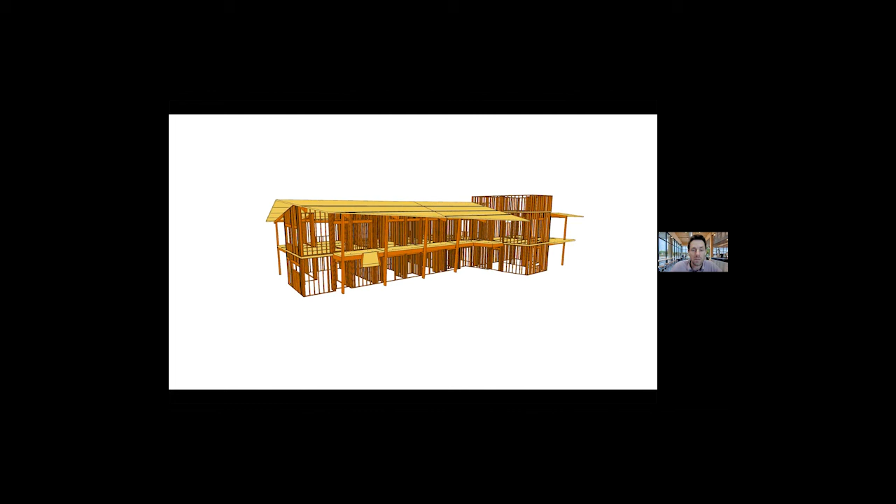Obviously once you get past around 6 stories, the stick frame doesn't make sense and is not even really achievable from a code perspective. But this idea of prefab stick frame with prefab mass timber floor and roof panels can be quite cost effective, and actually it can be really, I think, the right answer for some of the residential, and this is a high-end hotel. But this idea of having the stick frame allows you to have a lot more mechanical services integration. Also, the stick frame walls from a structural perspective act as your shear walls.

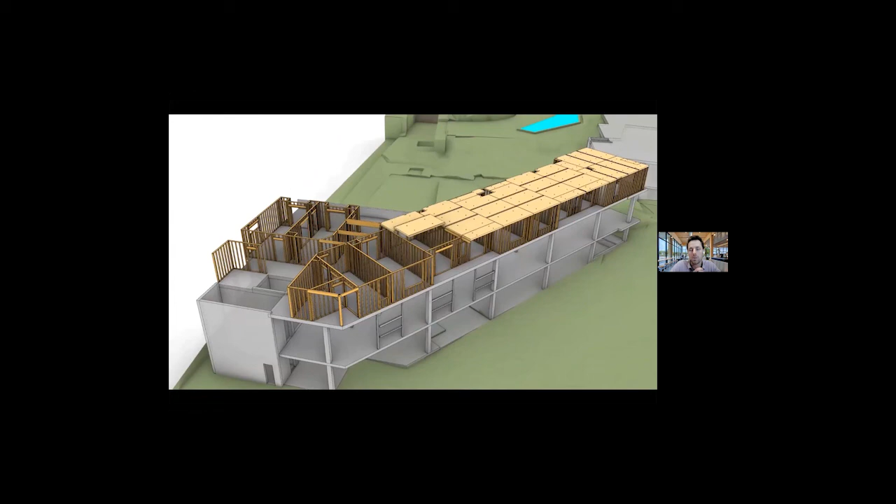So you're not dealing with... the other option is to do what we call a honeycomb structure, where you're doing solid CLT walls and solid CLT panels, and that's done in Europe a lot. But what we see here in North America, because the cost of these structures is so highly driven by the volume of wood, is that doing solid wood panels often doesn't make sense from a cost perspective, and the prefabricated stud type structure actually enables you to do more routing of services and have more flexibility and not have to have double solid walls, etc.

So this project also had a series of walkways along the exterior, which is more of a post and beam type structure, which connects all the different hotel units, and this is just a look at some of the connections, etc.

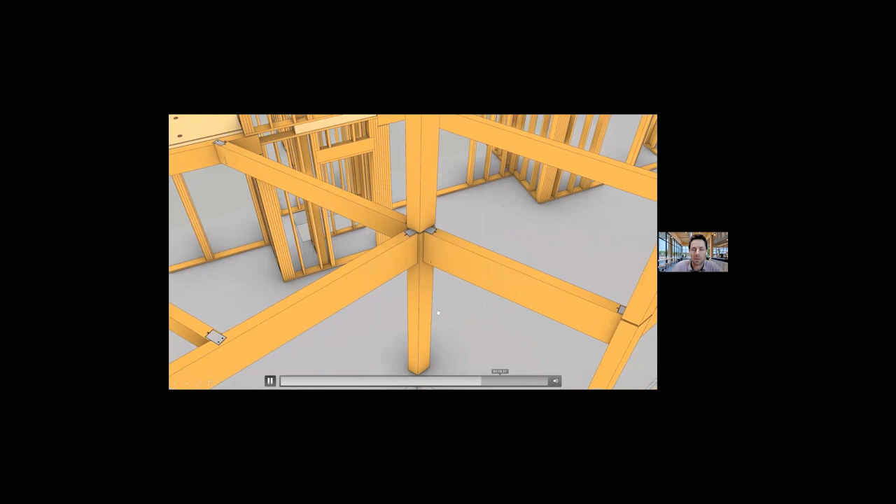But the neat thing, I think, about the mass timber on the stick frame is that the mass timber inside these hotel rooms or inside these spaces gives you this beautiful aesthetic, and that's really what we're seeing developers and owners and architects are really after, having a beautiful aesthetic that they can sell as a differentiator in the marketplace. So we see the mass timber on stick frame being a real contender in some of the building use types. Just some finished photos of that particular project.

Now I want to talk a little bit about another thing which tends to drive cost and structural design on these floor systems. When we as structural engineers are looking at a mass timber floor plate, say for an office building or even residential, what typically governs our design isn't actually the structural design of the elements, in other words, making sure that the beam or the column or the floor panel doesn't fail in bending or shear. What's really governing us is how bouncy the floor systems are.

And that's an area where there's a lot of work being done by a lot of the leading engineers, including Greg's firm and others. And we've been part of writing this new mass timber floor vibration guide for WoodWorks, which is going to come out, I think, later this year, to really look at how you deal with this issue of floor vibration, because it really does govern how much wood volume you have in your structure.

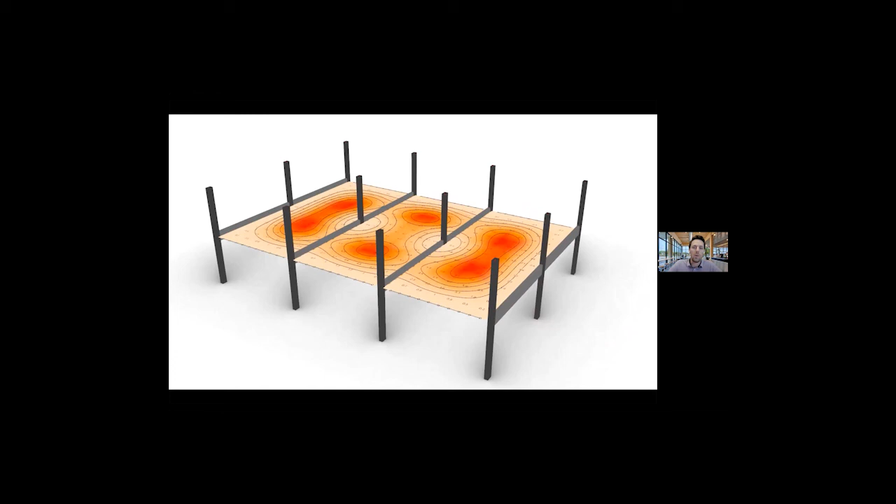And so one of the things that we've been looking at internally is a parametric tool to allow us to look at the vibration response of these mass timber floor plates parametrically, so that we see how different floor plates and grids and spans and thicknesses of panels change our floor performance. In this case, this is plotting the acceleration on the floor plate as somebody walks on it as your grid and bay size is changing.

So that's a little bit of a look at mass timber and some of the different core systems that we're seeing come to the fore. And now I'll talk briefly about freeforms and longer span structures and what we see as an opportunity there for really pushing the limits with timber engineering. I'm going to use a project we recently finished in China as an example of where we can really push timber to its limits.

We're seeing architects all across the world see timber as the new material of the 21st century. And they're starting to say, well, hey, if I can do big, crazy structures with steel, why can't I do it with timber too? And the answer is you can, but it does require outside the box thinking, and also owners and architects who are willing to push their stereotypical concepts of what might be achievable with a material like steel in these longer span structures to look at what timber can really achieve.

This is a series of 3 grid shells in Taiyuan, China. They're greenhouses, and the challenge put out to us by the architect was to create these all-timber grid shells. They're up to about 300-foot clear span, the largest one, so really big clear span structures. And of their type, they might be the largest timber grid shells in the world, because they've only got timber elements in two directions, so they're not triangulated.

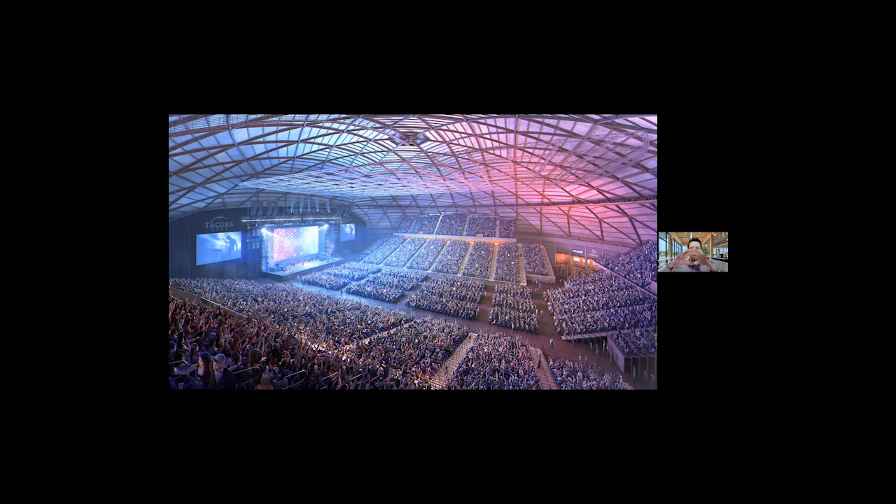Superior Dome is actually the largest span timber structure in the world that I know of right now at 163 meters, built back in the 90s. And these structures were actually all built using these triangulated, reticulated type topologies across a spherical cap. So they're sections of a sphere, the geometries of these roof structures.

And on this project in China, the architect from Vienna was pushing us to look at a grid structure which actually only had elements in two directions, not three. So it's not triangulated, it's actually just got quads as a geometry. And from a structural engineering perspective, that's actually quite challenging.

If you look at the steel grid shells that are all over the place, the Smithsonian or British Museum, you see the steel that's welded to each other to create this very stiff joint between the two layers of the two directions of the steel grid shell.

Here with timber, you can't weld timber, at least not that I know of. And so if you can't weld it, how do you fix it together? How do you create this moment capacity between the different directions? And you need that fixity because otherwise you get what we call in-plane shear buckling of the shell.

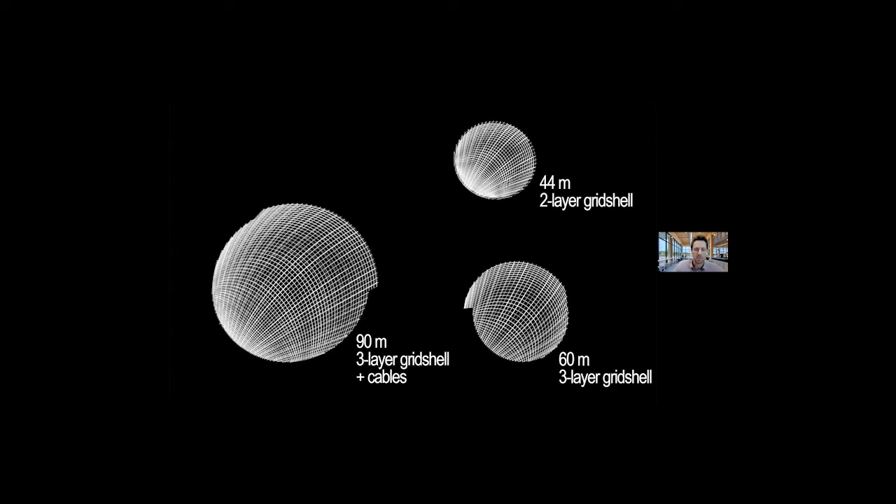And so these are the three grid shells in the structure. The biggest one is about 300-foot clear span. And the biggest two, we used a 3-layer grid shell, and the smallest one was only 2 layers.

And so one of the big challenges was the geometry and looking at how to rationalize the manufacturing process of these shells. If you look at a pattern on top of this, it is almost an ellipsoid. And if you look at putting a radial and tangential pattern of geometry onto this shell, you end up with a geometry which looks pretty simple in plan view.

But actually, if you take a piece of glulam along each of these lines and you look at it by itself, you'll realize that it's actually doubly curved. That adds a lot of complexity to the fabrication and also really limits. There's only about 2 manufacturers worldwide who can press an initially doubly curved billet of glulam.

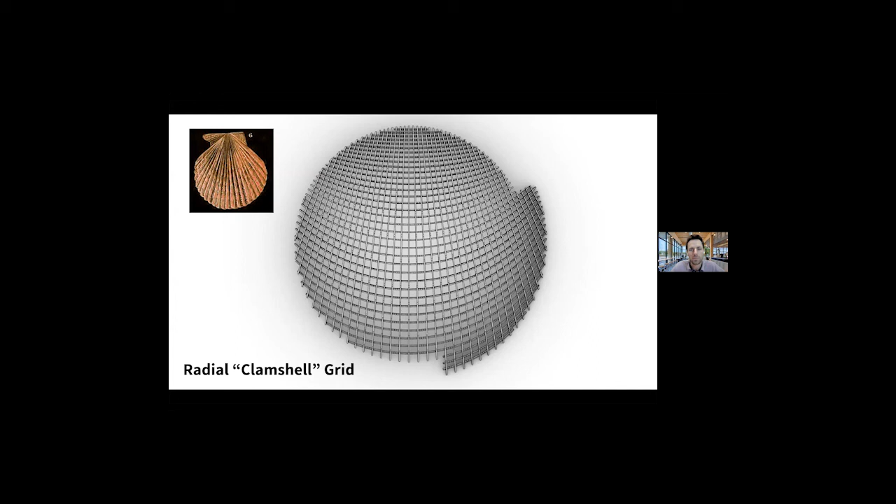So we as engineers had to find a different way of rationalizing, removing some of that double curvature. And so what we actually did is we looked back at some of the work that Bucky Fuller did back in the 60s and 70s on these so-called Bucky domes.

And it's a way of patterning a surface with what we call geodesics. Geodesic sounds like a complex term, but it's a geometry term for a curve which just connects the 2 points in a surface by the shortest path between them. And so Bucky Fuller patterned these spheres with these elements which went along the path, which are called geodesics.

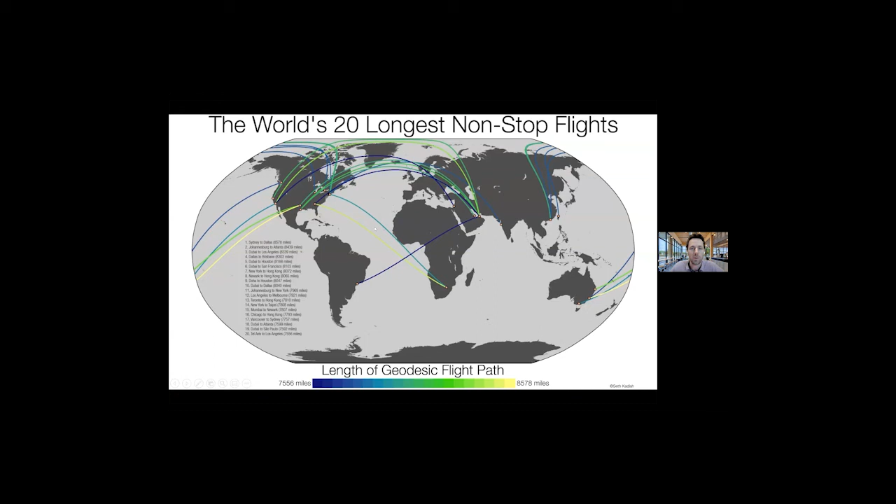But from an architectural perspective, we had to do a tweaked version of that to achieve the openings. And so we're able to remove a lot of the doubly curved glulam, but there still is, in the radial direction, some doubly curved glulam in the structure.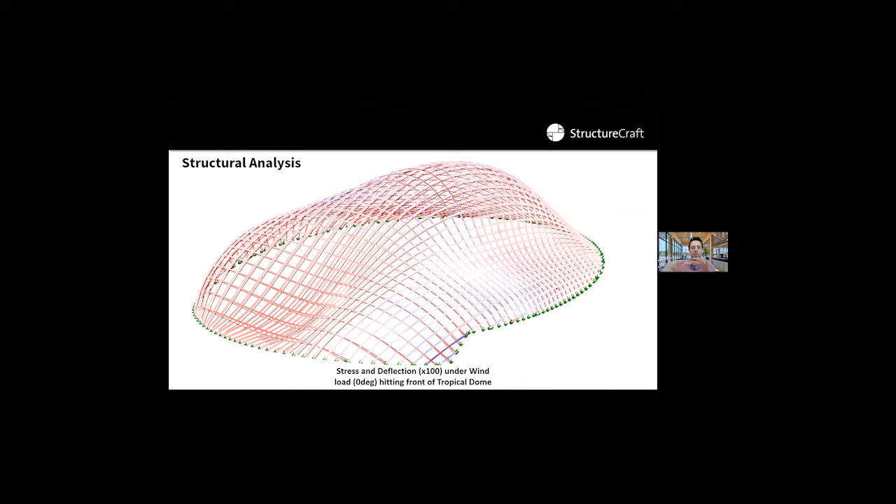Now to analyze these structures, you need a parametric approach. So this is using Rhino and Grasshopper and computational design to look at different grids, different densities of patterns on the shell. And then looking at all the different wind load directions, for example, applied on the shell. So this computational design approach is critical to achieving the longer span structures.

So what we had to do is look at connection design and small scale testing and full scale testing at our shop. These are some pictures of some structural testing we did.

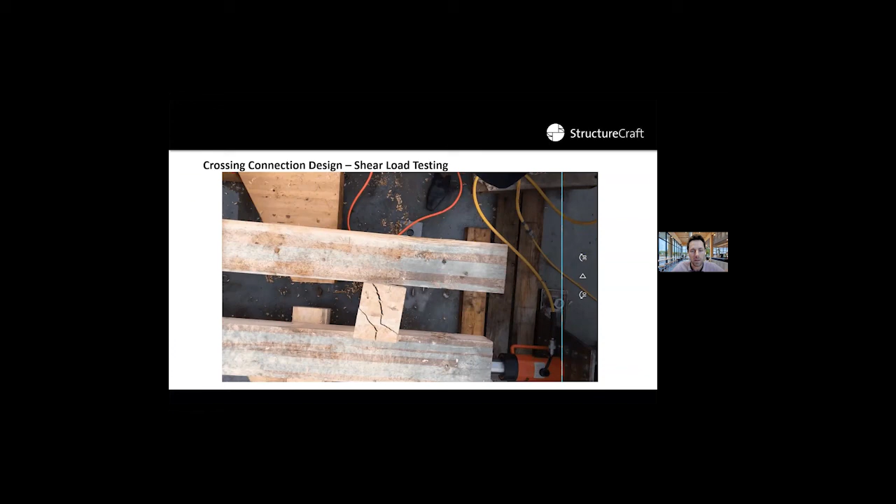We've got a strong floor at our shop, and we take some of our connections that we're designing through to failure and look at what the structural capacity of these joints is, and then what the actual stiffness of the joints is. So that gives us the confidence for developing these kinds of joints and knowing how they're going to perform in our structural finite element analysis models.

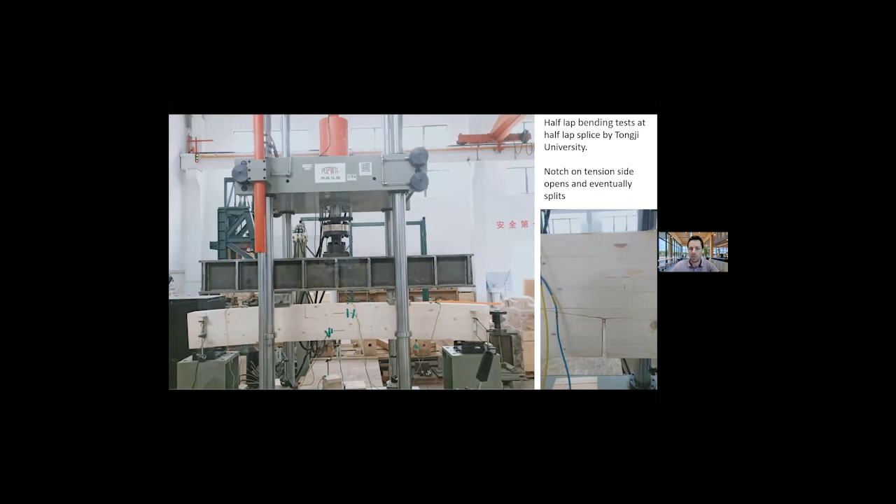So we take those small scale tests, put them back into the finite element model, and then calibrate that and check the overall structural performance. Some of the testing for this particular project we also did in China, at Tongji University, to demonstrate to the local authorities the adequacy of the different connections we're proposing.

But also from an engineering perspective, one of the big challenges is fabrication. I mentioned this whole idea of doubly curved. We worked with two different European glulam manufacturers to make all the several thousand cubic meters of glulam required for this structure. That was a big challenge. We're actually taking our Rhino models and we're going straight to CNC files. So we developed our own custom, I guess you could call them libraries, to allow us to go to the CNC file level from our Rhino models.

And that's really key. And that's also what some of the Europeans are doing for some of the larger scale freeform timber structures that we see happening in Europe, like the Swatch building, et cetera.

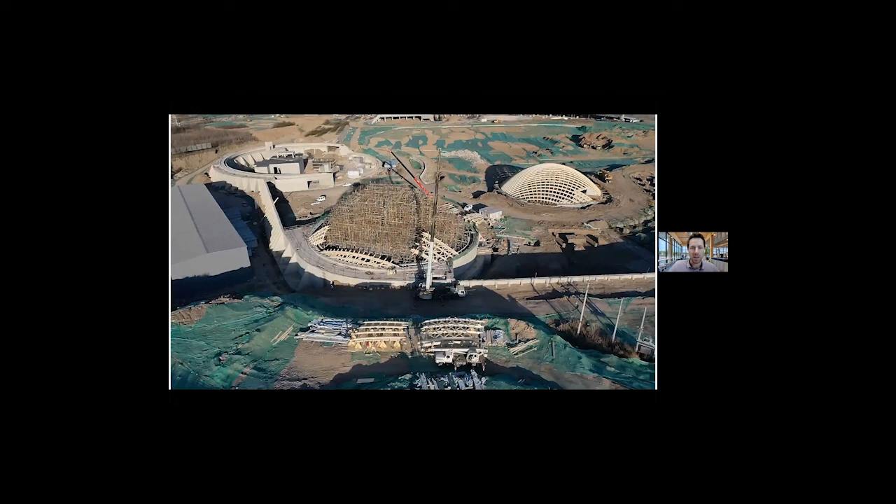So here you see one of the first domes completed, and in the background you can see what is a sea of scaffolding. Our original concept for installing these structures used shoring towers, which quickly got thrown out and got replaced by a crazy mountain of scaffolding, which I almost couldn't believe would be the most cost-effective way to do it. Pretty certain that wouldn't be the case here in North America, but in China this is the best way of doing it, and the cheapest way, and probably in the end the safest way, given the way things work there.

So here you can see the prefabricated approach. When you're engineering these structures, it's not just about checking your structural capacity. It's about how do you actually manufacture it? How do you assemble it? How do you install it? And so here you see this concept of breaking this shell down into prefabricated panels. And these panels all come in a sequence, and they're prefabricated adjacent to the actual construction site, and then flown into place.

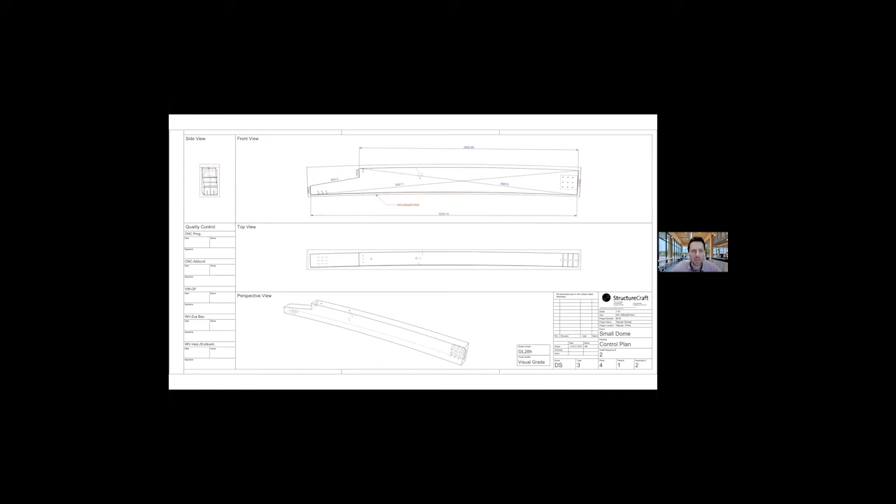So this is the Rhino fabrication model, and then through to the finished smallest shell here. You can see some of these panels flying into place. Shop drawings are also important, also coming straight from Rhino. And here we're using what we call block glued glulam from Europe. So it's double wide glulam, which is then CNC'd in both directions to create the double curvature.

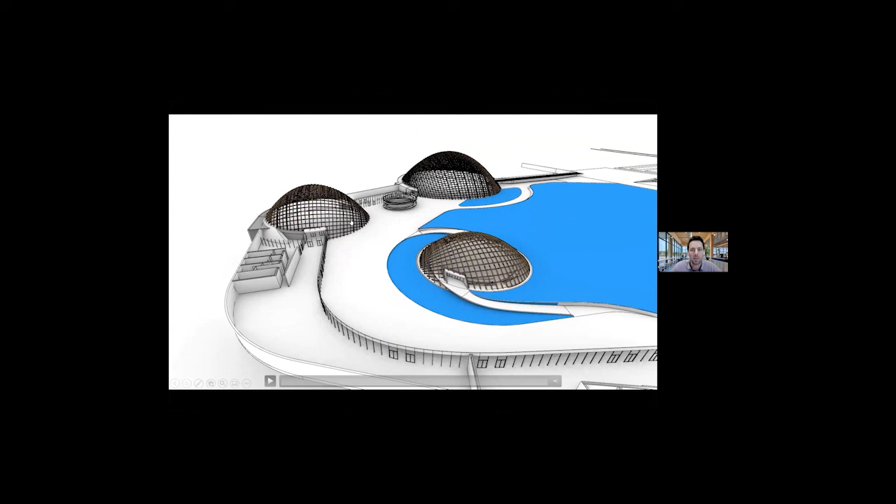And this doubly curved glulam element is then part of a larger scale panel, and this prefabricated panel is what then gets installed onto the timber structure. So this idea of prefabrication, even when you're in an on-site setting, is key. This is the largest shell here, where you can see this diagonalized cable stiffening grid, which we used on the largest of the three shells. The two smaller shells didn't use any cables to provide stiffening. They're just using the moment connection between the timber joints.

So prefabricating, but then also binning all of the glulam into different radius bins so that we can optimize and not have every single one of the several thousand pieces of glulam have a different press setup. Even in Europe, where all the press setup for the curved glulam is fully automated, it's still a lot of work to change the press setup for every piece. So you have to reduce the number of press setups. That's key when you're doing these more free-form structures.

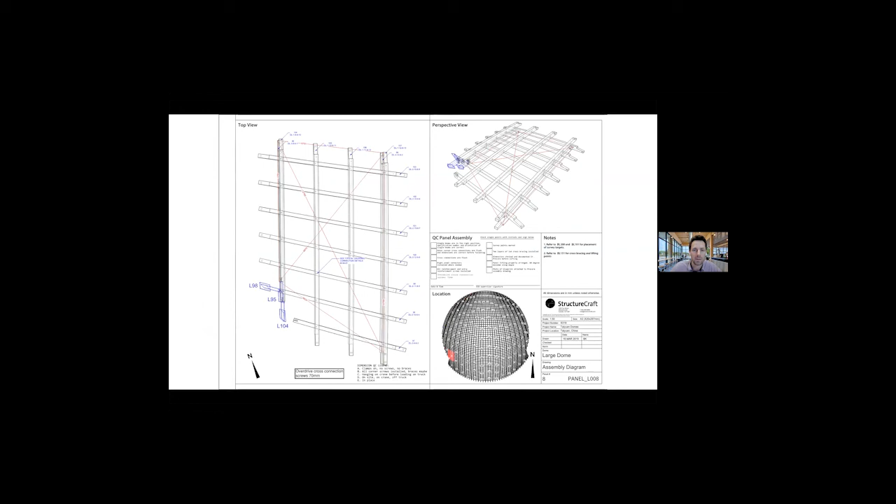These are some of the panel shop drawings for each of the different prefabricated panels that go across the shell. And then logistics, another challenge: when you're getting product from Europe and shipping it to China, you've got to plan it very accurately. So this is looking at packing all these glulam pieces, doubly curved and singly curved, into shipping containers, and figuring out where each of the elements go, which level they're going to be on, how they're going to get shipped to the project site. Pulling some of the glulam out of the container, and some of the coating.

And on the largest dome, we used a cable net, which I want to talk briefly about because that was a really interesting challenge. We talk about timber engineering, and sometimes I think to myself, actually, it's steel engineering. Well, it's timber engineering, but it's using steel.

Many engineers often say that timber structures are a bunch of connections held together by timber elements. And what they mean is that the connections are the biggest and most important part of any timber structure. How you achieve the connections is really what drives the success of your structures.

And here on this biggest dome, we had to use this diagonal grid of cables to stiffen the timber shell. And the big challenge that we had here is coming up with a connection between the cable net underneath the grid shell and the grid shell above.

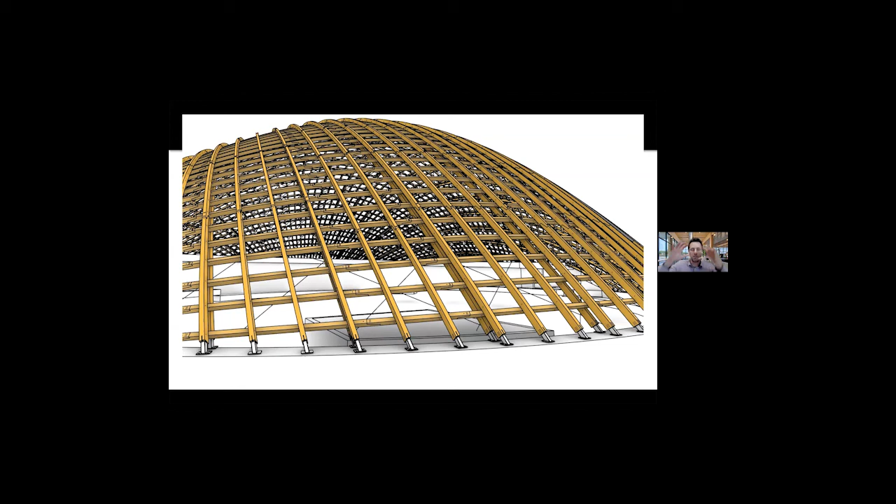And you can see this casting node that was developed in close design collaboration with the architect, basically connecting all these cables, which cross at different angles, up to the timber structure above. We had to achieve a shear stiff connection between the cable net and the timber structure above.

And so to do that, there's a really interesting concept devised, which basically uses these decoupled castings to connect each of the cables together. These castings are threaded onto a central threaded rod. The central threaded rod then, once everything's in place, is tightened towards the grid shell structure.

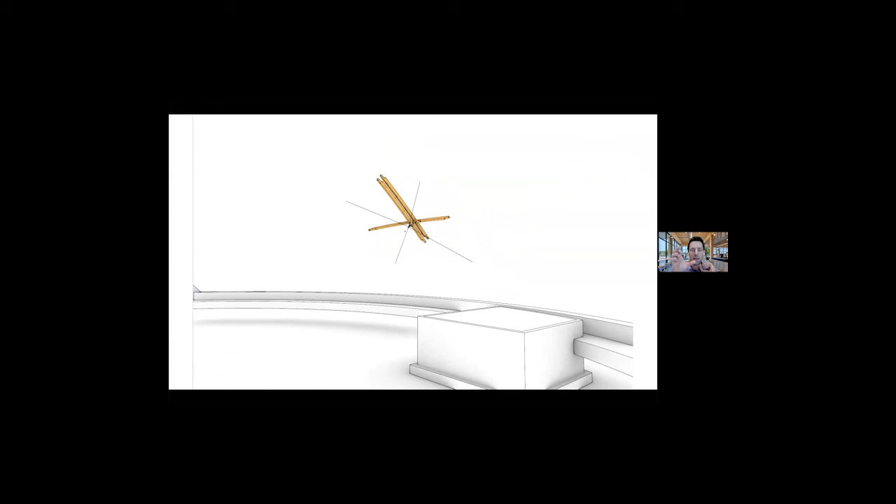And that process of tightening it towards the shell actually induces tension into the whole cable net. So that's how we were able to tension the net, as it were. This is some of the early mock-ups of this stainless steel casting, and some pictures of the shells as they were during construction before the glass started to go on.

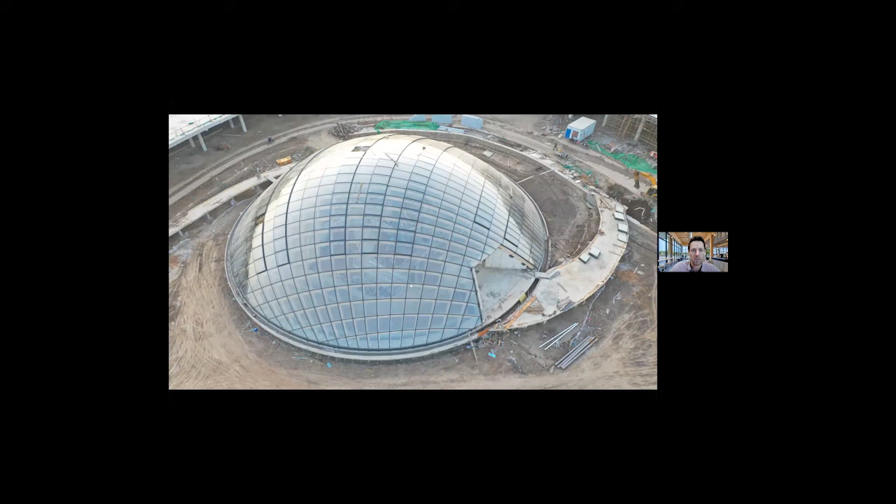The glass is stood off a little bit, so it lends a little bit more visual depth to the structure once it's completed. So this is the structure finished maybe 6 or 8 months ago. And some shots from the interior of the three different biomes: a tropical dome, desert dome, aquatic dome.

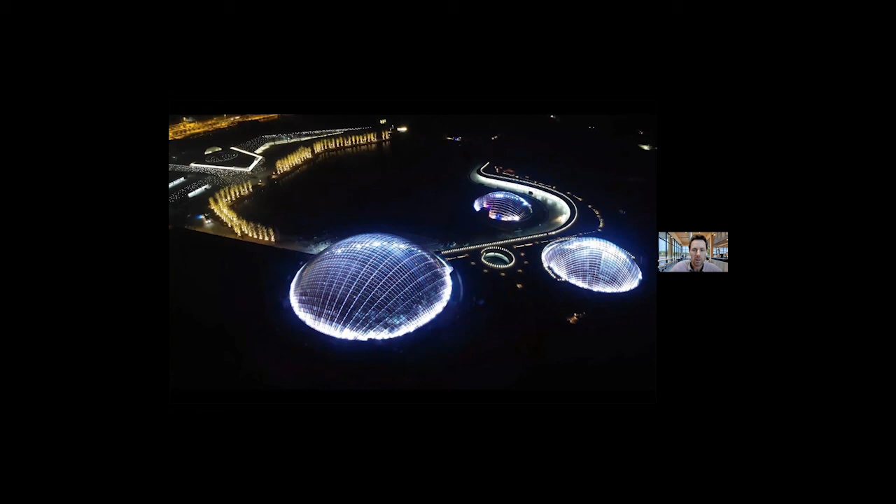So different plants and even different relative humidities and temperatures inside each of these three shells. So yeah, a really neat project, and I think a tribute to what can be achieved with timber.

So when you're conceiving your next timber project, let imagination be your limit. I firmly believe there are no limits to what's achievable with wood. It's a beautiful material, it's a natural material, and I think something that we should all be investigating as we move forward into the next generation of construction.

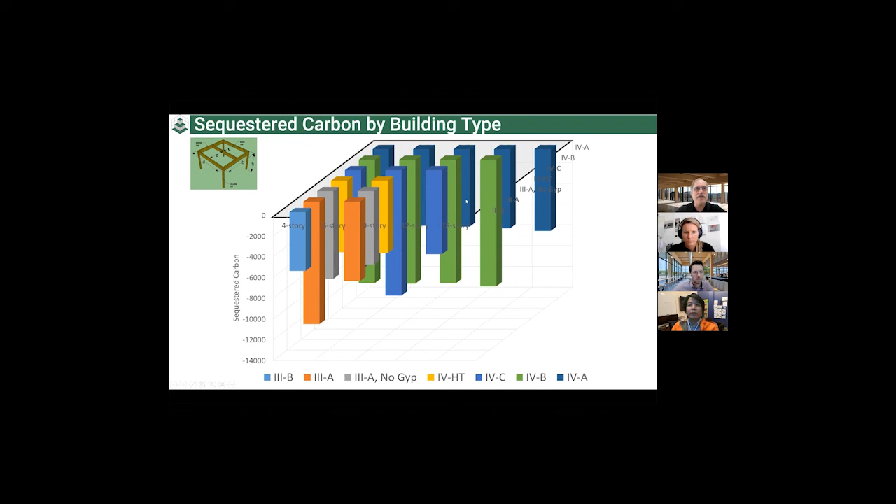So yes, we did look into that, but we're still actually digging through the data. This is pretty recent, so I'm really anxious to figure out exactly where we go from here. But yeah, that's the way we look at everything now: there's a dollar cost and there's a carbon cost or a carbon benefit, and how do we connect those in terms of value?

Great. Lucas or Peng, do you want to add on to that in terms of maybe some of the other parameters that you're engaging when you're doing these studies? Well, I don't have much to add to what Greg just mentioned. I'll throw in that in your original question, it seemed like I was hearing what's the sweet spot for mass timber, and I'm not sure I know the answer to that yet.

Lucas showed a really great project that was a really small hotel / dorm project with a hybrid of systems. That looks really promising to me, but we haven't seen enough of them built to really know if that's going to play out. But my guess is we're going to see a lot of mass timber buildings between 6 and 9 stories based on the new codes, because I think that's the sweet spot, and it's going to slow down for the 12 and 18. We're not going to see a lot of 18-story timber buildings for a while, but I hope we cover the landscape with 8 and 9 story.